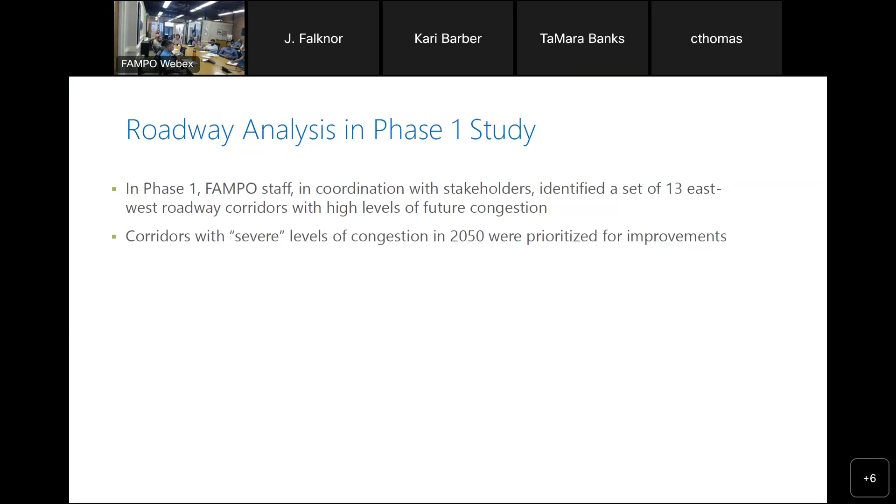We'll just jump right into it. Much of this is repeat. The 13 corridors identified are based on what we're calling severe congestion, related to the volume to capacity ratio anticipated in the year 2050 using the regional model. These are the 13 corridors we're studying. One thing I want to point out is there's one change from phase 1 to phase 2: we replaced Kellogg Mill with Enon. That was based on discussion about our priorities in the region, and Kellogg Mill fell out, replaced by Enon.

So as I was mentioning, what we've done so far in this phase is a validation of the model findings from phase 1, making sure we had the right files. There were some discrepancies, so we worked through those. For example, the model is from 2015, so there are projects that have been constructed, are under construction, or are in the CLRP that we want to make sure are accounted for in our modeling effort, so we're not trying to fix a problem that's already been addressed. We did find a few of those, so there was some back and forth with FAMPO, VDOT, and their consultant to make sure all of those projects are accounted for.

From that point, we identified those corridors. We validated 13 corridors with severe congestion. In a minute, Drew's going to jump into showing you where those congestion spots are on those corridors, followed by a segment on what we propose as potential improvement projects to address that. Keep in mind we're talking about 2050, as opposed to the smart scale process, which looks at existing VTrans needs and congestion that exists today. What we're trying to do is be proactive and get ahead of those future congested areas to make sure we have those projects in place. I think we're going to jump into those corridors, Drew.

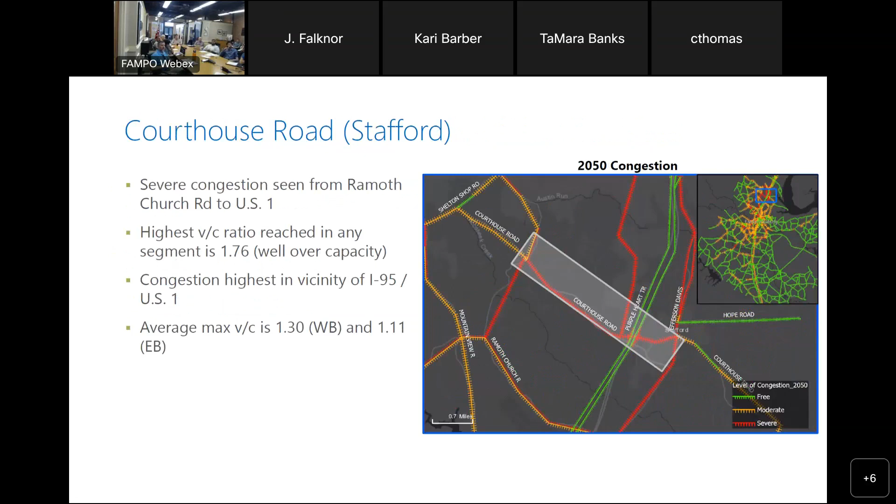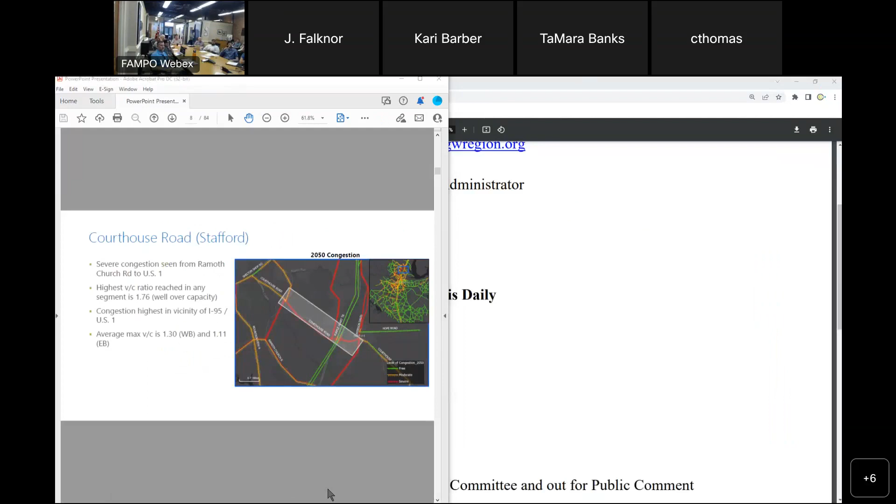So what we're going to do is make sure we've got this set up. Here we go. We're going to work our way across the 13 corridors.

Here we're talking about Courthouse Road on the Stafford side. You can see we're looking from Ramoth Church Road, coming across 95 and ending up at Route 1, an area where in both the east and west direction we're seeing red. Anywhere on these charts you see red, that's where capacity is over that severe metric. Here we actually have some segments where we get as high as 1.76, almost 2 times the capacity of the road in terms of traffic and congestion.

And so this is a corridor that's decently congested to 2050, heading into really the future heart of Stafford County.

So what you've done is looked at the 2050 model where there's going to be severe congestion, and then looked at the 13 roadway corridors and identified which portions of those corridors in 2050 will be the most severely congested and where we should probably pay the most attention. Correct, exactly. So our interventions are going to focus on those areas where we see the most red along those 13 corridors.

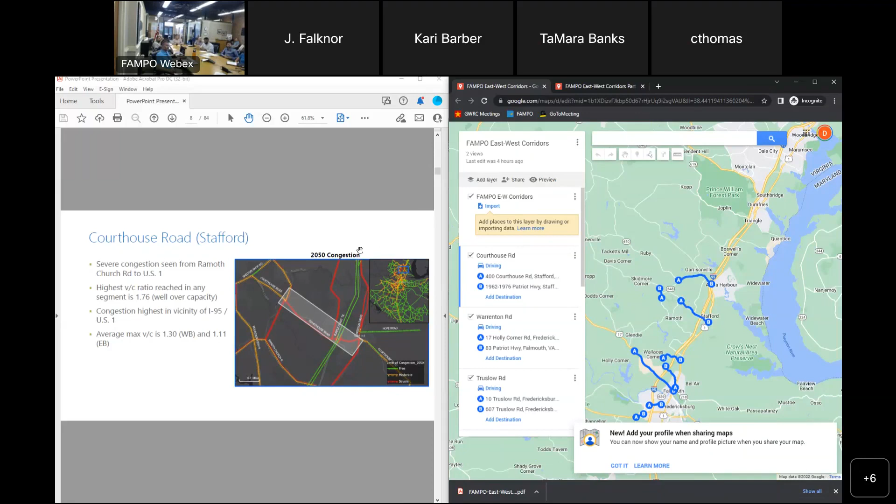Any other table setting about looking at these future conditions, what we call the no-build from a technical standpoint?

Okay, so our next corridor is going to be Warrenton Road. If we zoom in here, similarly we see a pretty long stretch - there's a little bit of a break, but basically all the way from Holly Corner across 95 over to Route 1. That's a theme to keep in our head - we're seeing pretty much severe congestion in 2050.

We do see another pretty high spike in one segment of up to 1.85, again nearly twice the average maximum VC throughout this entire area. The metric we're using, which was used in phase 1, is the average maximum - so this isn't saying just through the entire peak, but basically on a daily basis how high we're seeing VC spike throughout the day. In both the westbound and eastbound direction throughout this corridor, we're seeing over one - the whole corridor being over capacity on average.

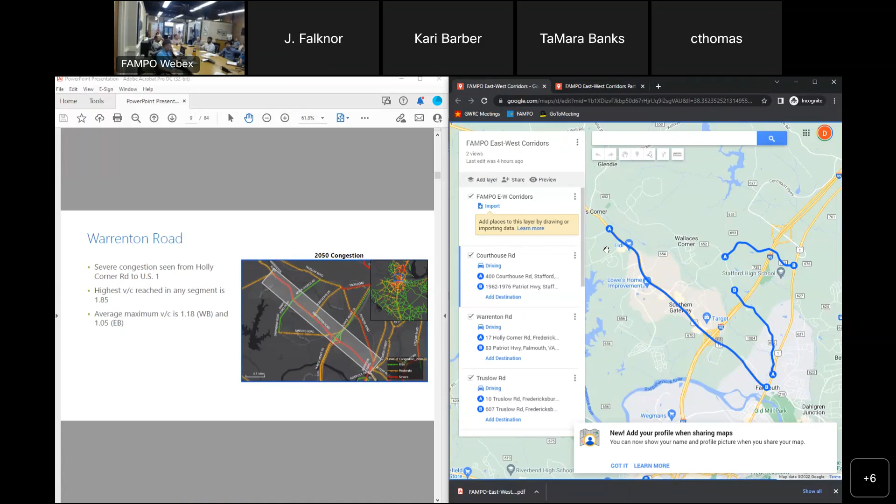That's US 17, if anybody doesn't know where Warrenton Road is. So here we have it on Google as well. Moving here, and so then we shoot over here to Truslow.

And you can see down in Google here. Now, Truslow is a different sort of road. It's a little more local in character, one lane in each direction. There's some short turn lanes.

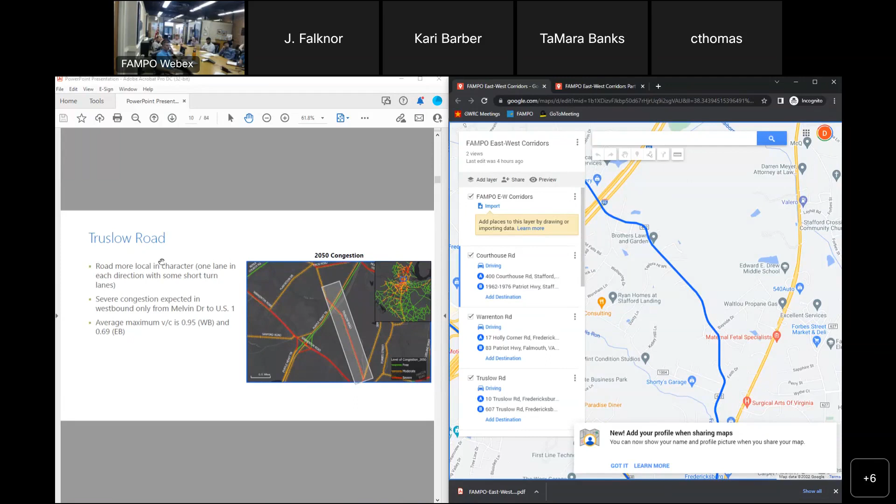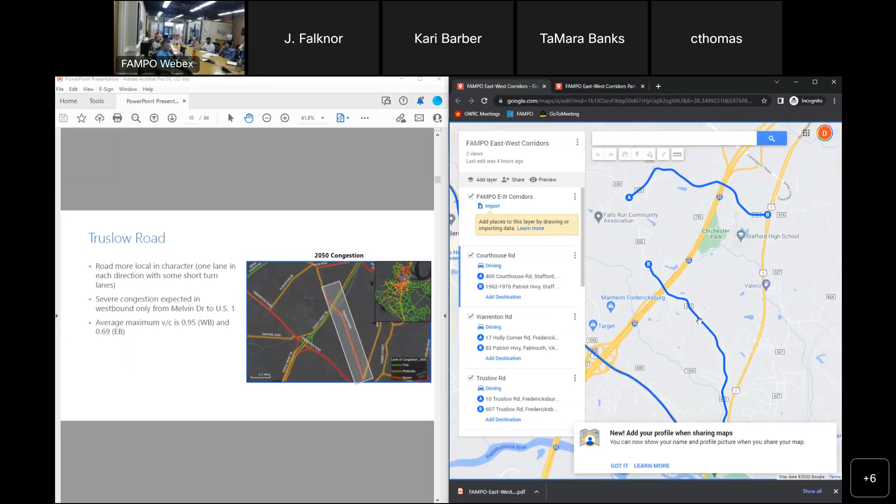What we see here is, as we try to get our awareness, the network's traffic is hunting for different east-west routes because there's a lot of congestion here, well over capacity. We start to see severe but not quite as bad congestion on Truslow going from Route 1 and crossing over to 95, dissipating a little as traffic distributes into the residential neighborhoods on the west side of 95. So it's not the principal route driving a lot of traffic, but it's becoming more congested as east-west and north-south flows continue to grow to 2050. That's the nature of that road, as you can maybe see from Google. Again, it's not a major arterial, but has more of that rural-to-residential character.

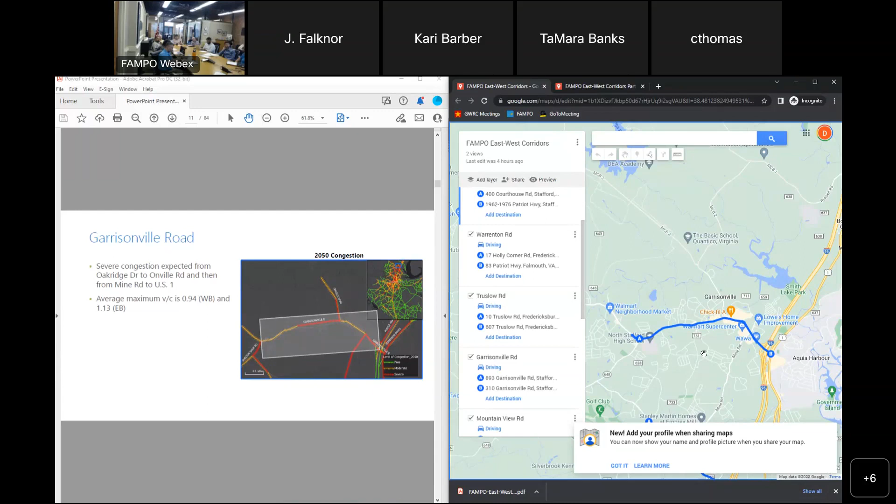We see two sections, basically from Oakridge Drive to Onville Road, then it lightens up a bit, and then as we get into both the commercial areas we have there, as well as the close proximity of both 95 and Route 1, those two major north-south drivers, that's where we start to see a spike again in the future congestion.

Then if we hop over to Mountain View Road, we get into another type. Truslow was one type of road, providing this sort of redundant east-west route. Mountain View Road sees congestion for a somewhat similar reason, being on the periphery of the main routes to 2050. It starts to see traffic around major intersections in what, again, is a more local, residential, formerly rural type of road. So we see this short segment of congestion.

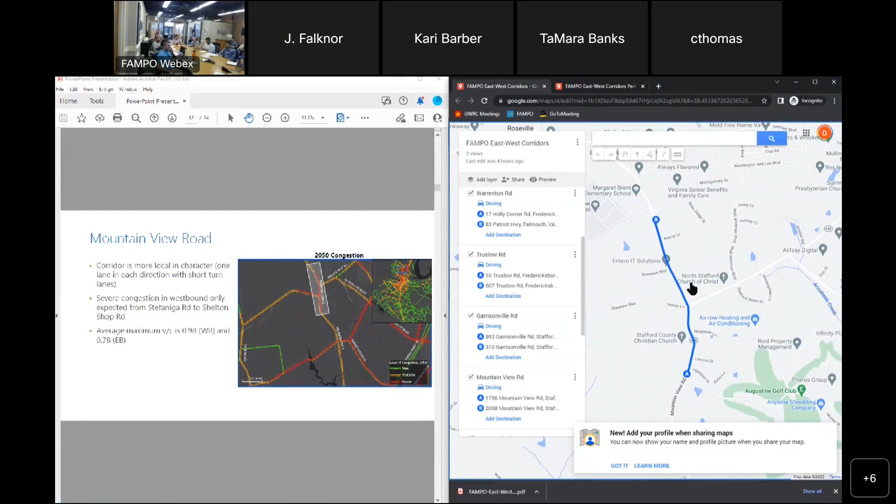I'm zooming here so you can see some of the things in the area. But basically from Stefaniga Road to Shelton Shop, you see a level of severe congestion in the westbound, northwestbound direction. In the eastbound direction, we really don't see severe congestion throughout this corridor. So it's really about that movement around to the west, more on the periphery of the heart of activity that we see in some of our corridors we were just looking at, like Garrisonville Road.

Taking into consideration the projections, are they taking into consideration planned land use changes, or is it the whole thing? Okay.

Exactly, and one of the things we'll talk about is there's a way to look at what the model is doing and also think about the land use vision that folks have, and how that might create more network effects to help deal with the funneling of traffic along only the major roadways. But yes, this is based on the 2050 land use projections.

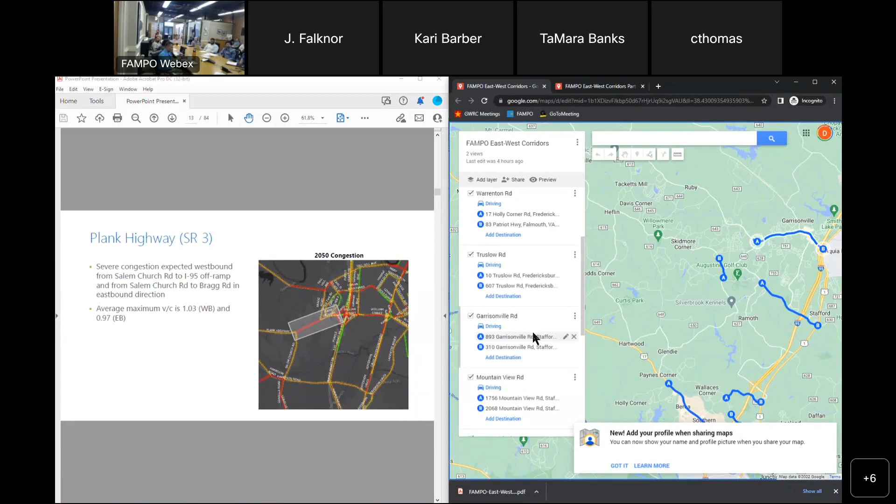So a road that a lot of folks know quite well. Oh, go ahead. I was going to say, Joe, it's the default land use. I know that there are a number of other land use scenarios that the model has, but this is just the default land use that's the projected base.

Yeah, so there are ways we could dive into greater detail about land use scenarios, as Nat is saying. That's Nat Grier from our team, who's really led the modeling work and is just joining us from afar today. That is an element of thinking through the land use and the future land use that communities want to create, and what roadway network best supports that.

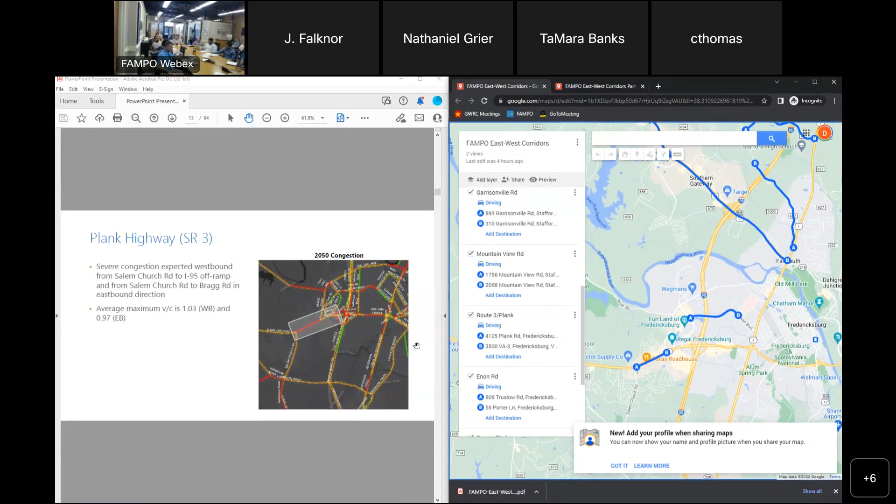Route 3, a corridor that folks know quite well, I think. Within Route 3, there's been a lot of study. We've been engaged with pipeline studies. The area that really pops out within this 2050 study is looking from Salem Church to Bragg, so really on the west side of that Central Park area, moving westward from the cities.

And that's an area where, again, there are gradations. Even though we're seeing red, where we spike up in that maximum volume-to-capacity ratio, before we were talking about 1.75, 1.8, this is a place where we're talking about 1.03 and 0.97, so hitting the stats, but not quite as severely. We also know this is an area where there's very complicated traffic operations, and therefore that influences how much we can do here to try to bring those numbers down to reduce congestion.

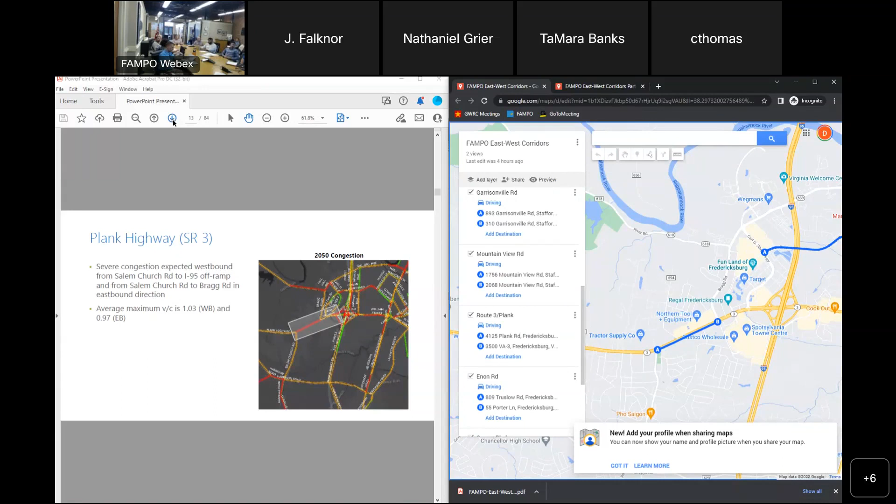Enon is another road, sort of like Truslow, showing this east-west workaround. Enon up here provides useful connections from the west side and the residential neighborhoods over to Route 1, and then over to the on-ramp that Centreport provides onto 95. The nature of the circulation is such that people have to go here and there, so it gets congested, but not as severely as some other routes.

As we'll talk about, it's an interesting place where north-south traffic affects east-west mobility. One of the reasons for this study, that Ian was very invested in, was advancing the study of east-west mobility, since so many of the conversations in this region are about north-south. We can't always escape the impacts of north-south traffic on east-west performance, and that's something you'll see in some of the proposals we look at, balancing east-west mobility against the tug that north-south traffic has on overall operations.

Then we'll shift back down here, to Cowan Boulevard, connecting the city and the Central Park area.

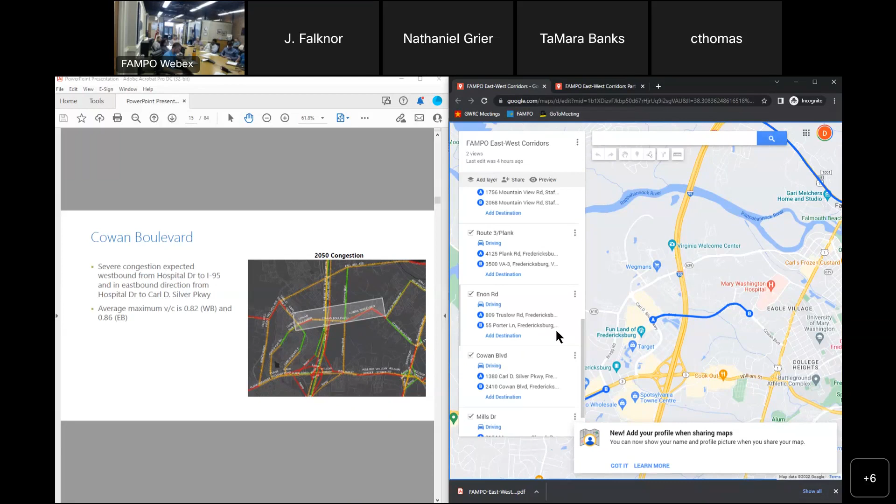This is an area where we see some severe congestion near the hospital, and then in the Central Park area in segments. The quality isn't great there, but we have basically segments of red, and in the middle, actually around 95, we see a bit better operations. There again, remember 0.82, 0.86, those are about our threshold, so really in most of this we're just at the threshold. That goes to a point of whether this is a place we would invest, versus other locations that might be more severe.

So we'll keep moving through those and get to the fun part, which is what do we do about it?

Mills Drive is another area identified in phase 1 that's somewhat like Mountain View, a specific area where traffic comes together to create a discrete section of congestion. You can see here from Virginia 608 to Benchmark Road, in the vicinity of Spotsylvania Station, we see some congestion both westbound and eastbound, but the eastbound, as you can probably make out on the map, has a larger section.

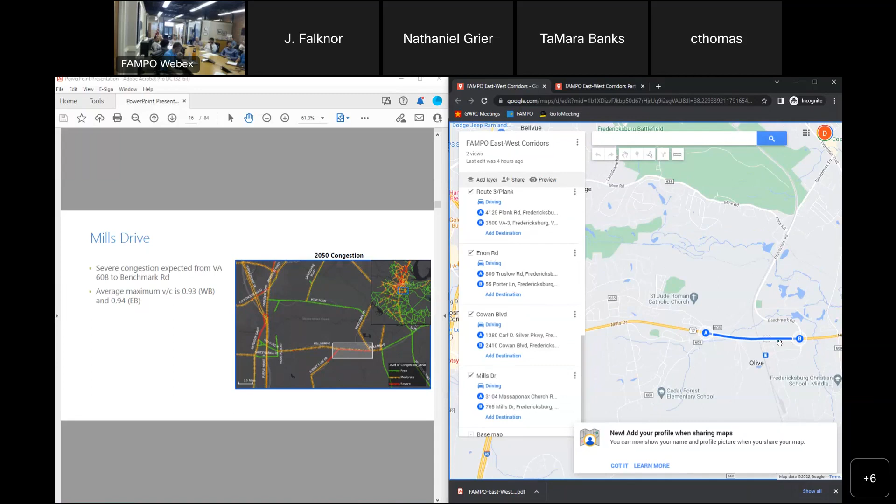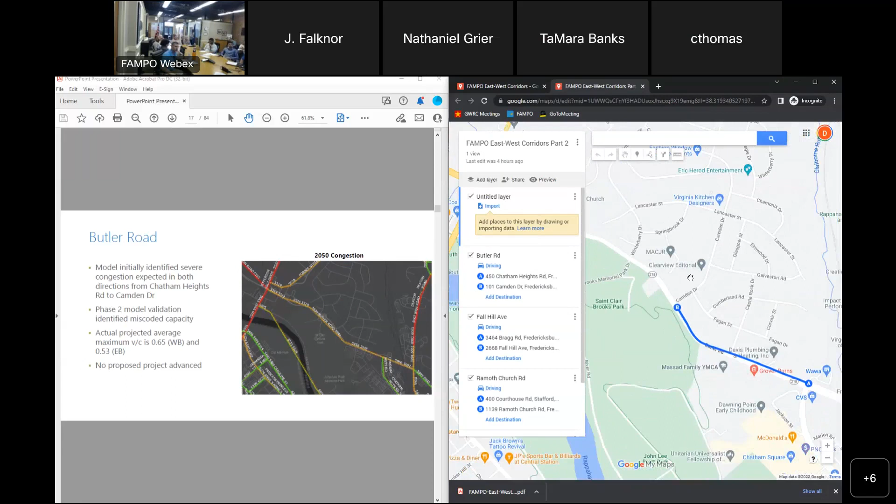One of the things we did during the model validation period - if folks have worked on model work, they know there's a lot of iteration to get it right - is find that Butler Road in the phase 1 study hadn't really captured all the capacity that's there. So what we found is that the congestion seen in phase 1 for Butler Road, we don't actually expect to materialize in 2050, and it should remain under the severe threshold. This is just outside downtown Fredericksburg; we were initially seeing some congestion in the vicinity of this neighborhood, but that turned out not to be capturing all the roadway capacity. So we won't talk any more about Butler Road today.

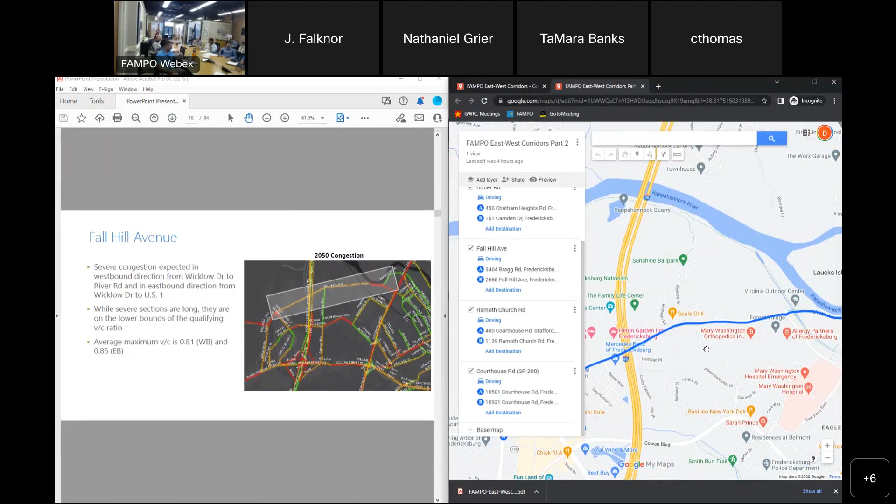So Fall Hill Avenue is similar to what we were seeing below with Cowan, though with a bit of a longer edge - really it's on either end, with our focus on the east end coming towards Route 1, where we see the section of congestion. Generally the sections we see are on the lower bound of that congestion threshold.

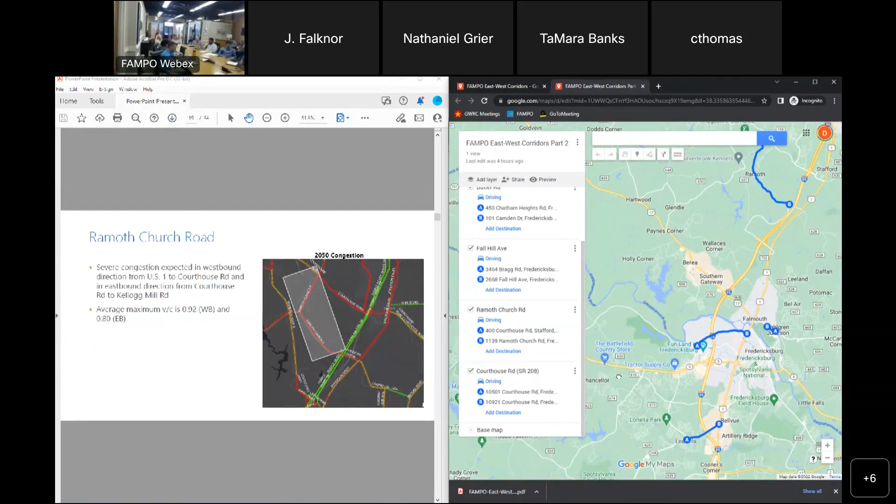Let me pull up Ramoth Church Road, another one of these roads on the periphery of growth activity seeing more congestion. In 2050, traffic seeks to fill out the network that's there. You can see a relatively long section on Ramoth Church coming around here, from Route 1 and Courthouse Road, connecting all the way - the map wouldn't go all the way because of road work. So from Route 1 to Courthouse, we see this prolonged section of congestion in the westbound direction, much more modest in the eastbound direction, not continuing the whole way.

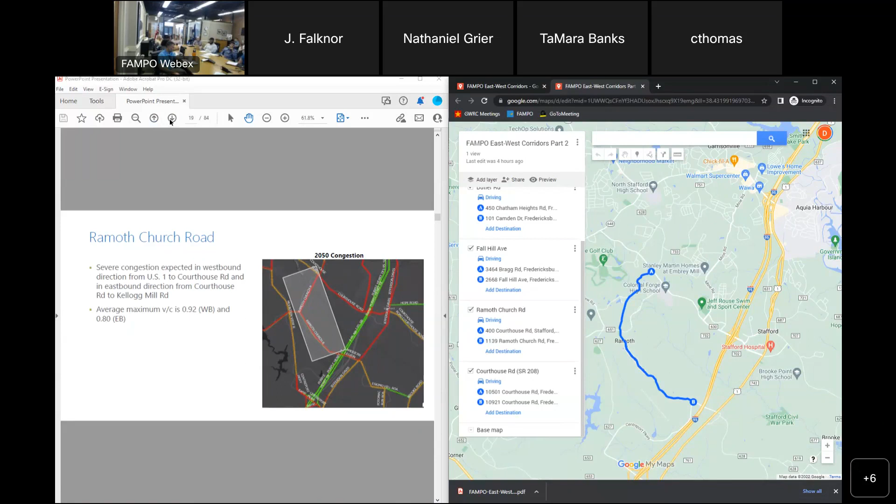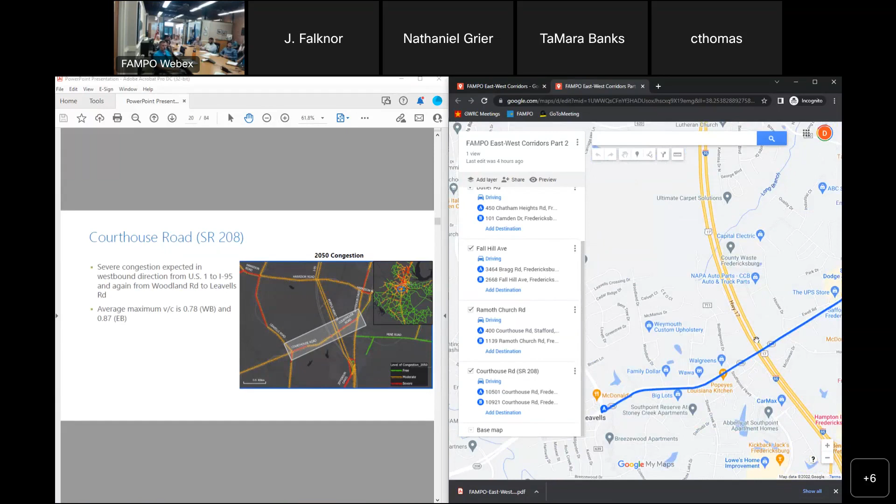Then the last one, having worked our way through it and setting ourselves up well for what we need to do next, which is figure out how to deal with these challenges, is Courthouse Road, another area that's a pretty wide arterial today and is just hitting that threshold. In the westbound direction, its average is below 0.8. In the eastbound, you can see segments of congestion, particularly around the cluster between 95 and Route 1, near Leavells, where different traffic comes together in an area with lots of industrial and commercial, auto-centric uses.

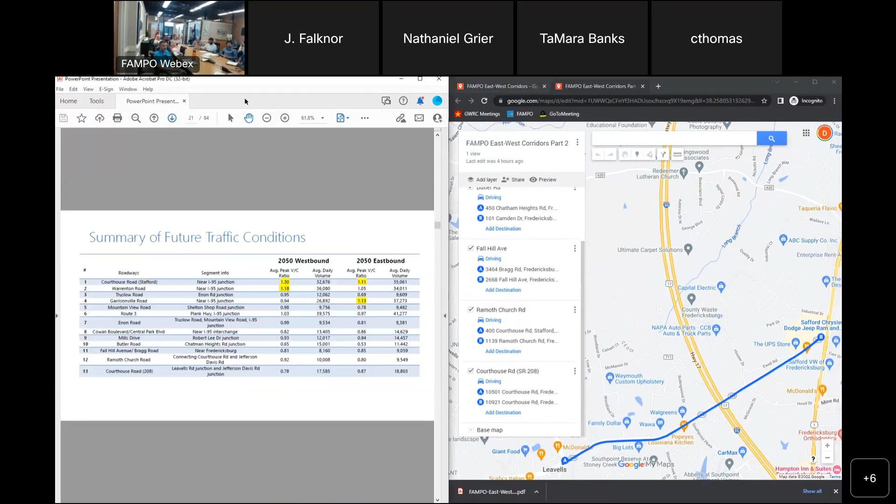So what do we see overall from that picture? Basically, we see a lot of roads approaching that 1.0 threshold where things really get terrible, and a lot of roads that have crossed the 0.8 threshold, and then a few places, like Courthouse and Warrenton, where that V/C ratio gets substantially higher, above 1.

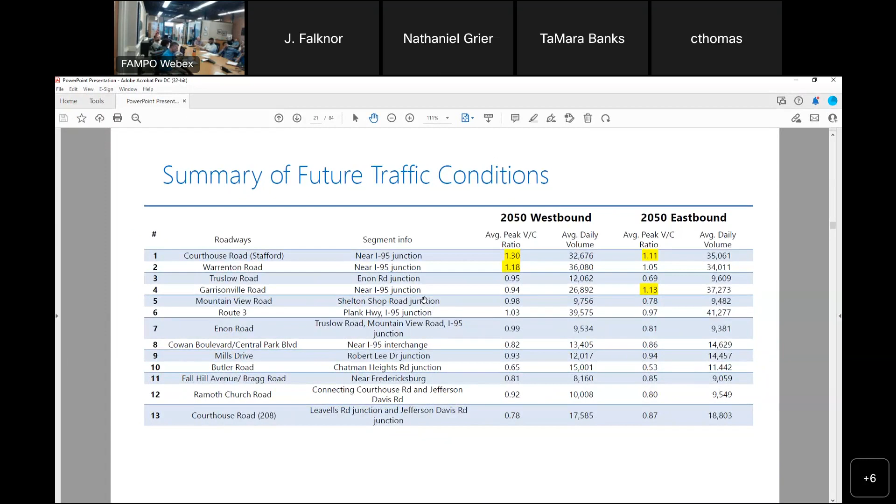So where is this all happening, and what seems to be driving this in the model? A couple of key findings to orient our strategies: congestion is often highest where two things come together — auto-oriented commercial activity creating trips in many directions, abutting I-95 and Route 1 movements. So we have a lot of regional access hitting against what's trying to happen in terms of local mobility, clustering together in a pretty tight space.

We know from other work we've done that this poses a lot of challenges, not just in this model, but when we actually try to do traffic simulation in a detailed way to move this traffic around. A lot of the east-west traffic, because of what's happening at 95 and Route 1, means the north-south traffic we thought we were putting aside for this study is actually playing a meaningful role in how this east-west traffic operates.

So what we do to the north-south will play a role, we think, in how we manage the east-west over time. In addition to some of the strategies we'll propose, we have a lot of congestion on roads that are already pretty wide — roads we've already invested in making larger to handle more activity and capacity. So some things to think about are parallel routes and access management, considering future land use conditions and how these trips get handled throughout the network.

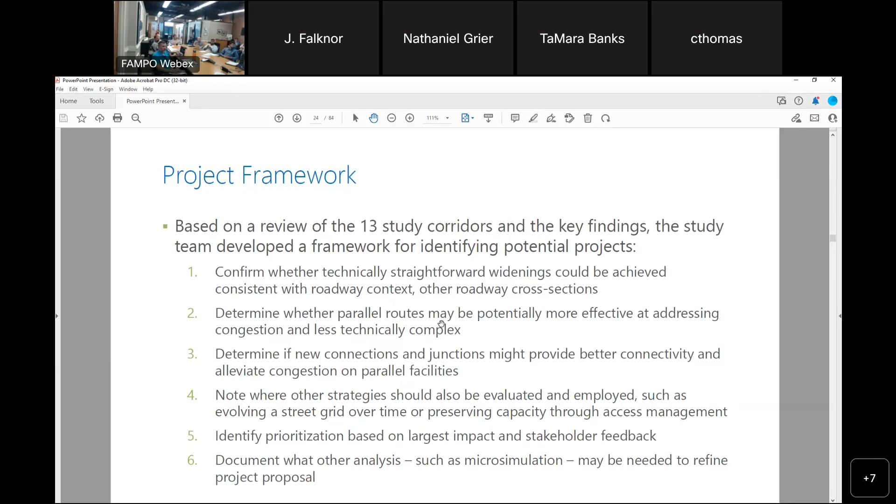Just some caveats about the proposed corridor projects we'll go through. These are draft proposals, ideas that VHB developed based on our experience and our review of the region's plans, but they're really our proposition to be put forward and engaged with here. There's more work that would need to be done to figure out if these are good ideas beyond the fact that they seem to have some traffic benefit—work with stakeholders and traffic operations.

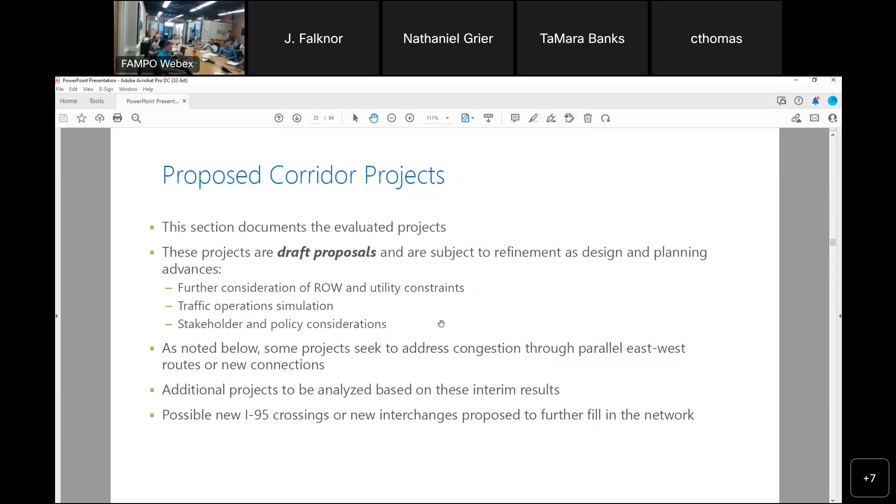We'll talk about a few of the big items, one of them being new I-95 crossings and interchanges, as well as connections across the Rappahannock. We have this slide that goes through the individual projects, and I'll talk about them specifically. There are a few regional projects, we're calling them 4, where we think different routes can benefit from a cluster of projects—so if we're thinking about 13 or 12, there are about 4 projects that we think can have potential benefit across different corridors.

Those shared, regional corridors are looking at: extension of Centreport Parkway between Ramoth Church and Courthouse—we'll show this more on a map in a moment—a new Rappahannock connection, combined with potentially, or separate from, an I-95 interchange near the Virginia Welcome Center, a new I-95 interchange on Harrison Road, and also a smaller project in comparison to those three big regional projects: widening of Fall Hill Avenue and connecting to Mary Washington Road near the hospital—a project that a couple different corridors benefit from, which is why it's on this regional list.

Before you move on, just a question—is there any significance to A, B, C, and D? Is it just in any particular order? I noticed on some slides later you also have A, B, C, and D, and I was wondering whether there's any significance or if it's just random. It is in the order in which they emerge if you read this table in the slides, so they're no particular importance—it's not a prioritization, we haven't gotten to prioritization. We're just trying to keep the logic of this table in the presentation.

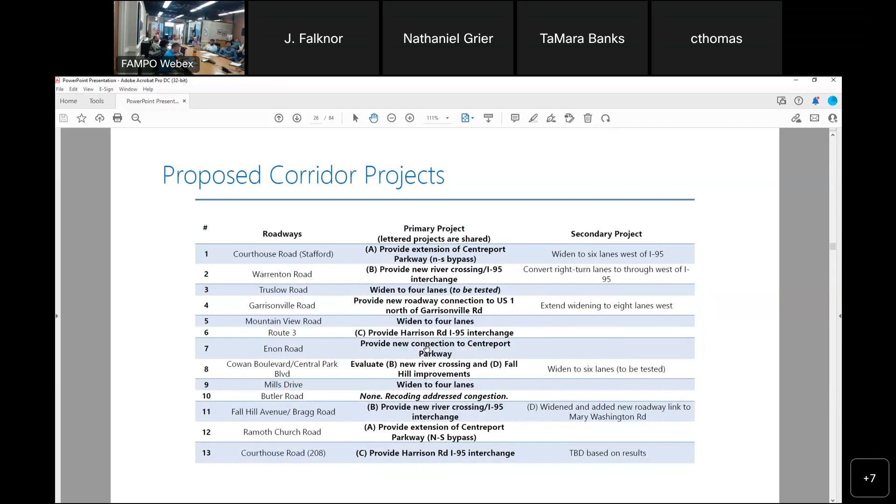Great. And so just to put it on the map there—I'm going to go in there.

So now these are key findings about these big picture ones. We'll talk through the different specific items.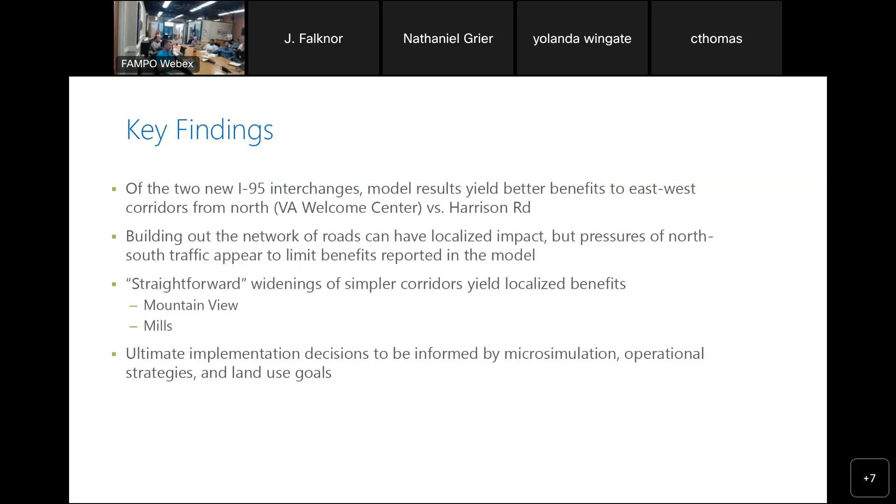And then we've made this caveat a few times, so I think I'll dive into the corridors. So Courthouse Road on the Stafford side, hopefully I can go back to Google Maps if people want, but maybe we're situated now. We basically have been looking at two things here. Go back to that table. Looking at that north-south bypass, also looking at widening the existing 4-lane section to 6 lanes. And so what do we see?

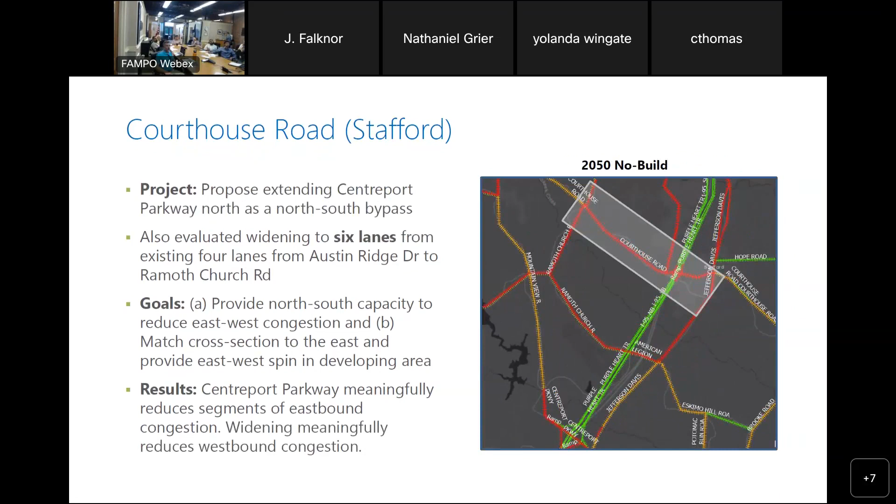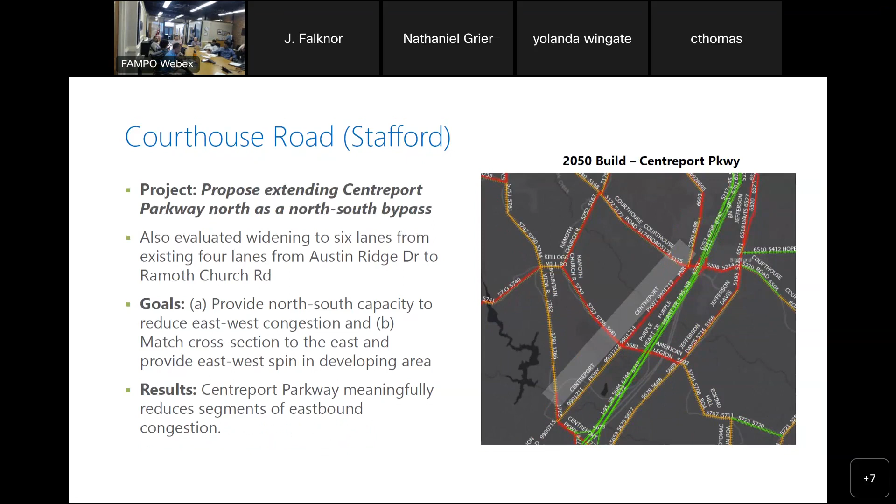What we see is that the addition of Centreport and that new access—if folks know exactly how Centreport's laid out, you'll see that this schematic isn't exactly it, and that's just a matter of the modeling. And all of this, that red is what we're trying to get to. So this Centreport Parkway comes in, and in the eastbound direction, courthouse, we address that latent congestion problem, but Centreport does pick up a lot of traffic. It's not a spring chicken in terms of the traffic it's handling. So that's something to better understand through more analysis, in future study, of how Centreport can be made to operate because of that east-west benefit it has.

We just ran this model run, why it's another color in approach, and in the final report we'll have this all squared up. But basically with the widening, whereas here we saw the east-west benefit, the eastbound benefit, with the widening we see the westbound benefit. So we see the different goals of the different traffic. Don't have a detailed answer of why that is quite yet, but we do see that each of these projects is helping with either direction.

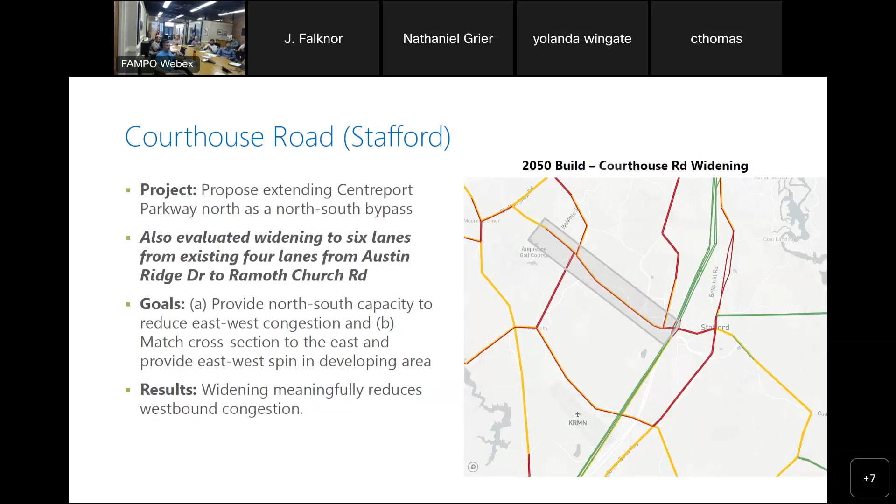I should have a cash register ringing in my head for this. So we've got the big picture one: the New River crossing along with I-95. And then in here we have some right turn lanes that we can convert to throughs, to get ourselves some more capacity so we have 4 lanes in each direction.

So what we see here is that the new crossing interchange brought together reduces congestion in a few segments, basically by 20 to 30%. Some of the more meaningful reductions we see throughout the process are in these segments along the corridor. When we talk about converting the lane to a through, we also see a pretty decent pickup, a 20 to 25% reduction in localized congestion, but localized is the key word there, very focused on the places where the lack of capacity meant the through wasn't getting enough traffic through that intersection or area, versus something more regional in its benefit.

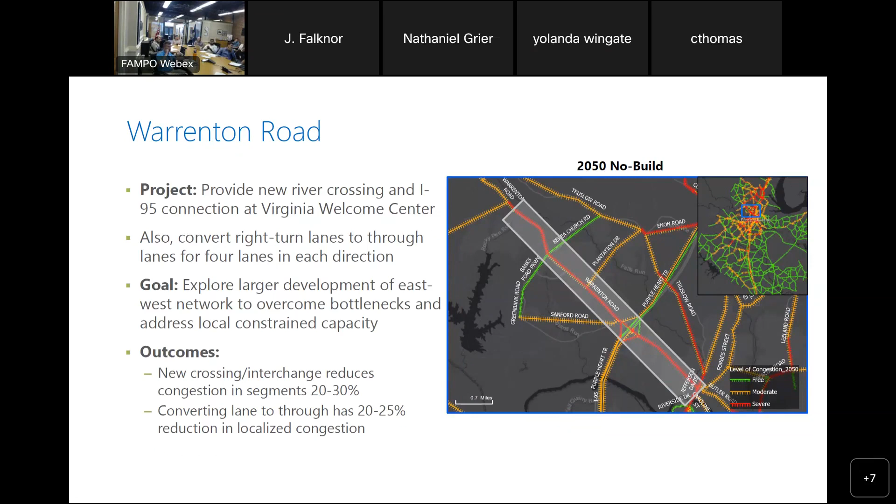So let's walk through how those different pieces come together. I'll start with the interchange because you'll see this a couple of times, and I recognize it's a bit of a mess, so we'll take a moment with it. This is the no-build. We have the big gap over on the west side here. What we looked at, we evaluated both things together: a connection across, and again this is not design, this is representational of going from over here to over there, getting that connection across and then getting the interchange too.

We do follow Celebrate Virginia to sort of have a route and have trips that we're building off of. I know there was some discussion about whether that's an appropriate connection earlier. We welcome all of that sort of feedback.

With your white block from here, being the furthest from the screen, it's difficult to see whether there's an improvement on US 17 or not, because the white color just makes it hard to see. Yeah, we'll definitely work on the representation here.

But the story is, if we start over on the far left, you can see a lot of red in this section. And then over here, all the way through Berea Church and Plantation, right until we get into the mess around 95, we're seeing that reduction in congestion. Fall Hill moves basically from on the verge of severe and severe, to becoming free flow to less than severe throughout its corridor. Warrenton sees a relatively large segment, until we get into the morass around 95, improve in its operations.

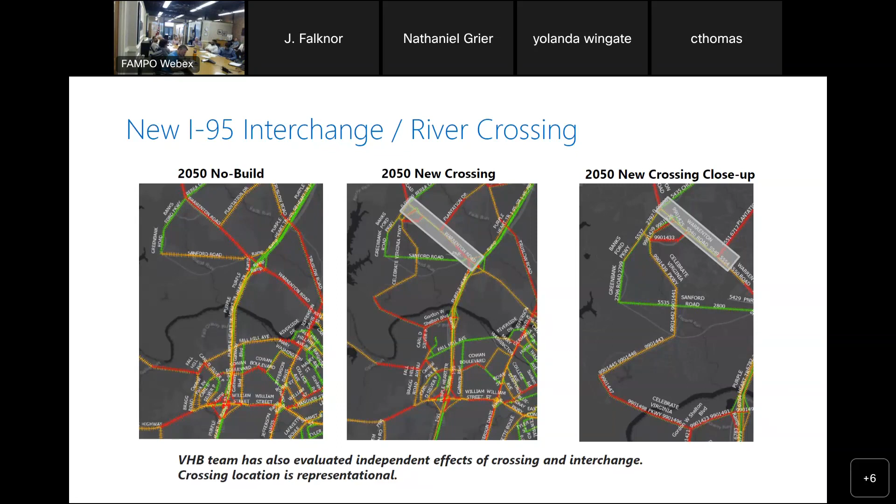Well, I guess the Celebrate side. Would it hook into the Celebrate Parkway? Gordon Shelton Boulevard is the road it would connect to on the western side. So, with this, Gordon Shelton Boulevard, it's the one that runs dead. It doesn't go anywhere. It goes past Celebrate Virginia and then ends just in the middle of nowhere.

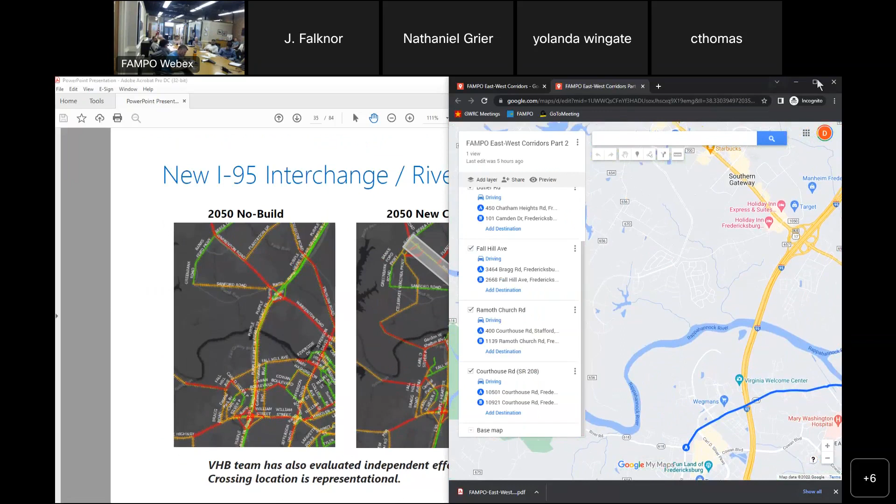The Celebrate Virginia folks had designed an on-ramp, or got a consultant to design an on-ramp or whatever, back in the day, and it was just never built.

So it's the one that's parallel to... Does Carl D. Silver Parkway become when it goes across Fall Hill? Does it carry on being called that? Yes, yeah, so it's parallel to Carl D. Silver Parkway. It's the one that's parallel to it. It ends now, it doesn't go anywhere, it stops.

Was that helpful? Are there other questions? Oh, I got it covered. Okay, well, once you finish, you did a lot of effort to get here.

So okay, sure, and yeah, we'll bring this up as one of these regional projects. There'll be something that we'll come to. But let's also look, oh wait, oh I thought you were going to play with the Google Maps.

Okay, so a couple of questions about this one, just real quick. So you've looked at the congestion on Warrenton, okay? Clearly that's got a benefit. Yeah, look at all that red now down in the city of Fredericksburg. So what are we doing about that? I mean, this just seems to kind of put one problem in a different jurisdiction.

I'm not quite sure I understand. Sure, so I think there's two layers on this, and Chris, you might have some thoughts there. So one is there's always a challenge of sort of chasing the traffic. Right, it's sort of a broad problem in how we deal with congestion. It sort of raises non-widening strategies as being part of the solution. It's part of why we have a transit component to this. It's part of why policies around parking, around land use, matter for what happens.

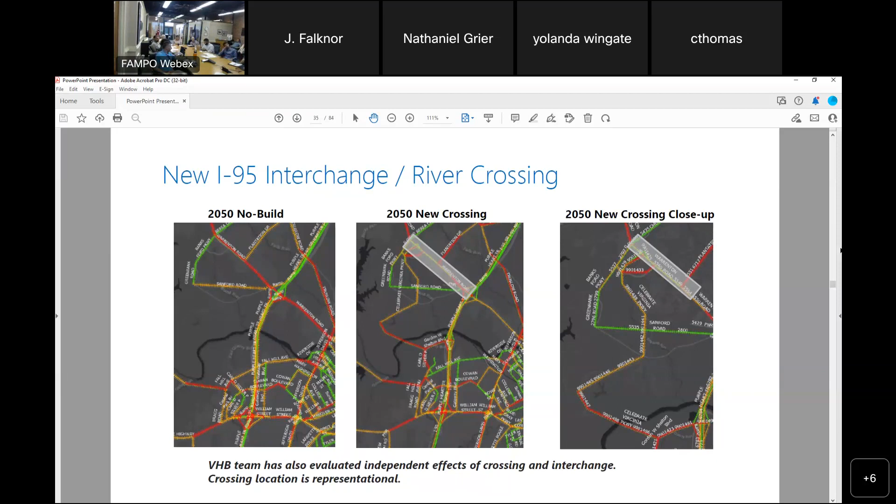All right, let's talk about a couple of different flavors of the types of things we're looking at. This is a big one, and it raised all of the policy issues folks are discussing - fundamental, big picture items where getting both that high level and that granular direction is critical. Our high level thesis is that these east-west corridors are facing a lot of challenges, and they force a response in terms of conservation, traffic management, planning, and mode shift questions that folks are raising.

So we can look at what some of the other east-west places are seeing and what types of solutions pop out, and we'll welcome the region's feedback.

So truthfully, we haven't modeled anything just yet. This is something where we have decent operations in the eastbound direction. The westbound gets more congested, but it's not too close - again, more residential, more rural. Something that could be widened and then maybe relieve some off Warrenton as part of a more localized network with a little more capacity. But it's something we're waiting to see how the rest of the projects come out.

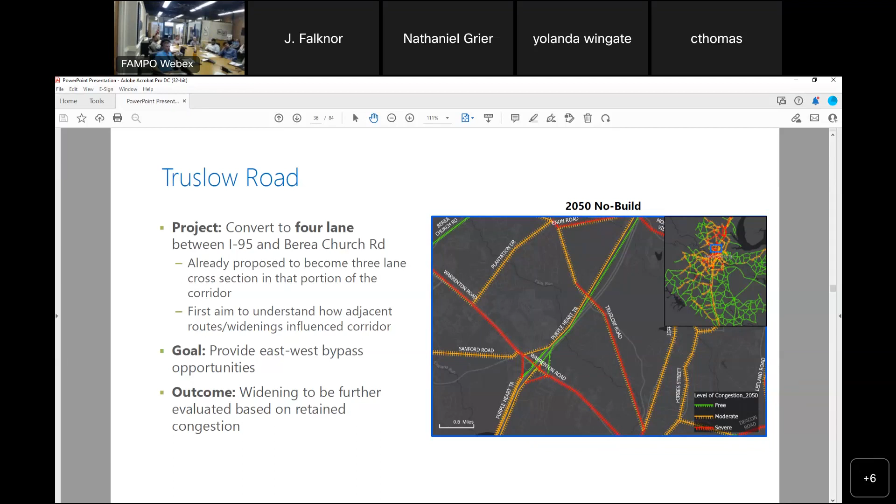So that'd be something we do in the next couple of weeks here. A couple of places where we did look at a couple of different options. Garrisonville Road looks at maybe two approaches: the widening strategy, a section where we're now all the way to 8 lanes, and then also creating a bit more of a grid.

Within the model, we evaluated what's called a centroid connector, which means this isn't exactly a road in this place, because everywhere you look to put a road, there are some challenges you need to think through. But if we can get that access across to that local point, this is about trying to bifurcate the regional travel from the local folks, and thinking about how we can build out better access to the economic development area here. So we look at going across 95 without providing an interchange, and basically we see in the areas right around 95 about a 10% reduction in congestion from adding something like that.

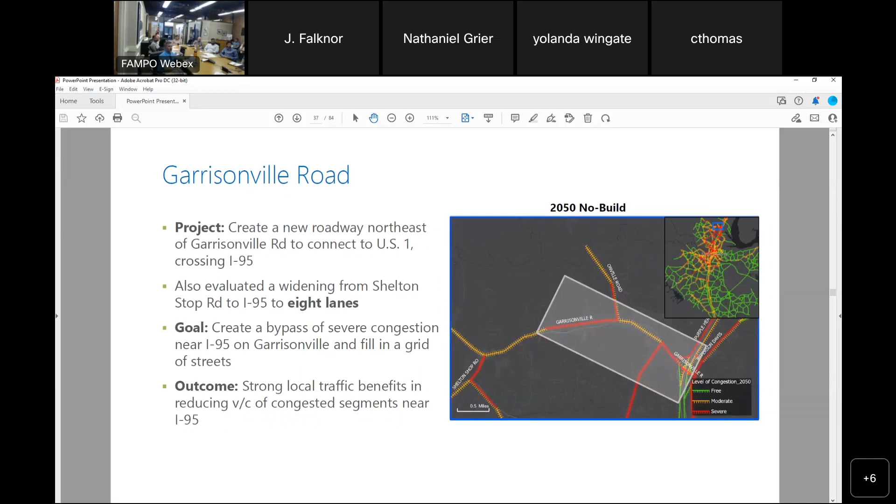And again, there's some graphic improvements to make, to everyone's point. When we look at the widening, if we go back to where we were, basically the widening out in the western section clears out this red, creating a consistent orange section all the way to Shelton Shop, until we get into the congestion approaching 95.

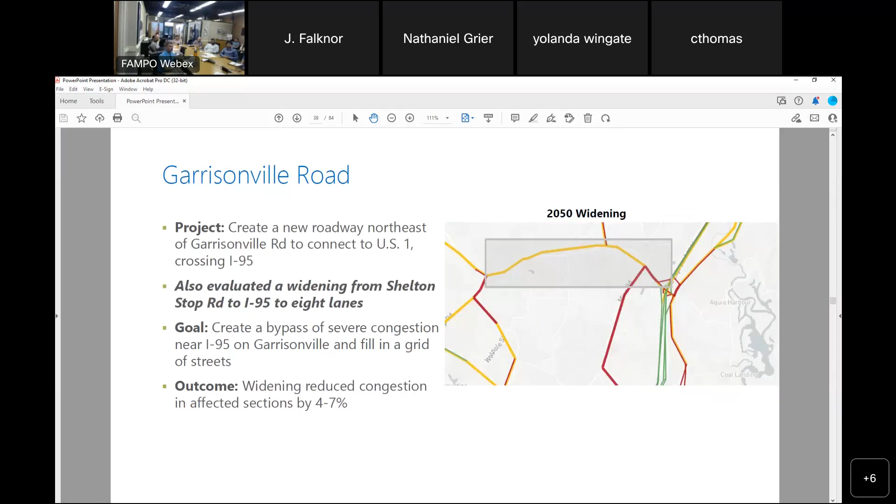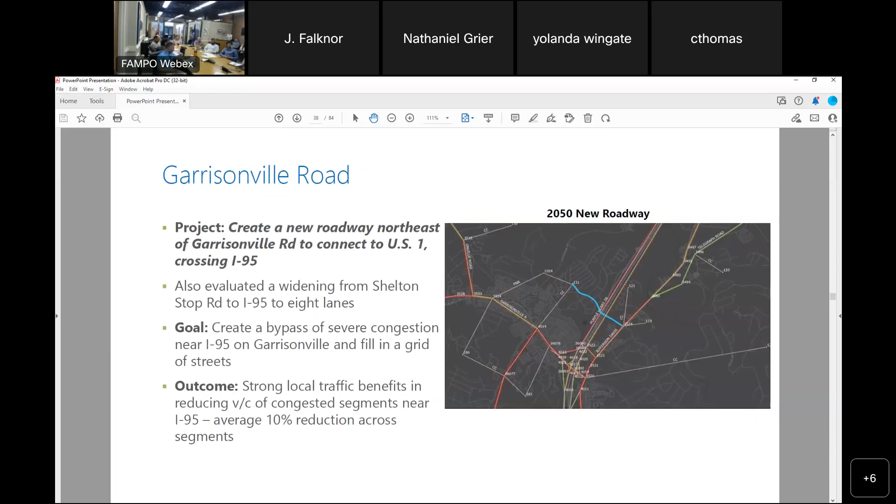So this being the ability there, again, to posit these two types of strategies: do we look at further widening the main line, which has pros and cons and some limits based on what traffic operations can actually handle? Or do we look at strategies around building a network that tries to pull things off of the main line in other locations?

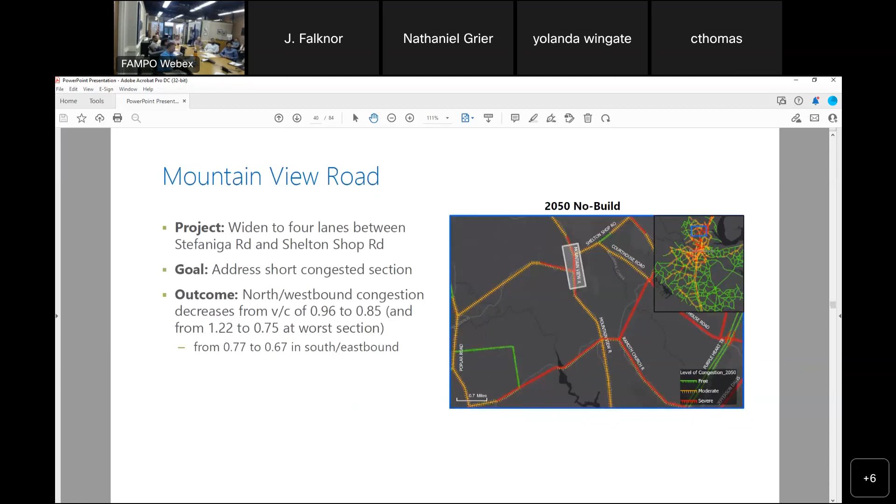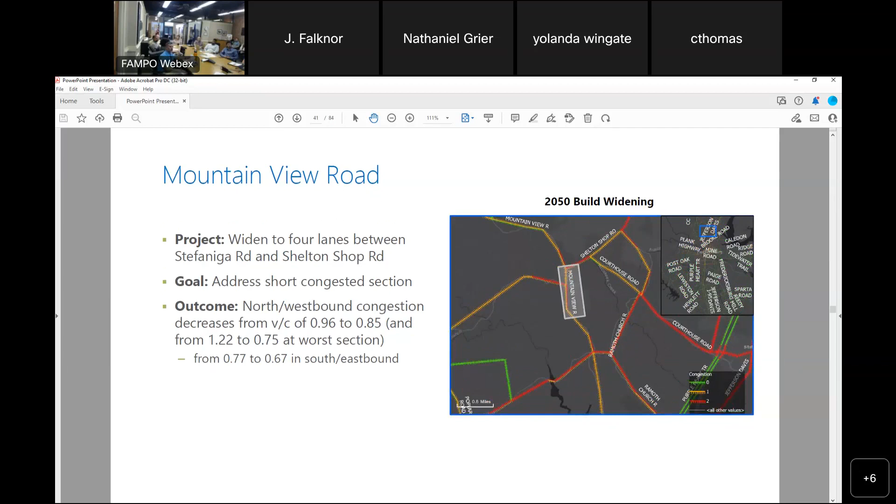Mountain View is sort of a good sample of what happens when you take one of these roads on the periphery where particular things come together. You add some simple widening, and here we still see a little bit - and I think this goes to the question about exactly how we show the red versus the pink. We see improvements along the way. There's still demand, and you have this cluster of connections, but with a little bit of widening in that northwestbound direction, we're able to solve a good portion of the congestion.

And then Route 3, right? We talked about how Route 3 is a very challenging area. A big pipeline study we've been working on is just dealing with a lot of challenges in trying to add capacity or make things flow better in this section.

So we wanted to look at this parallel route, which looked at the Harrison Road interchange. And basically what we saw there is pretty modest, about 1 to 2% improvements in congestion in the section of Route 3 when we brought in the Harrison Road interchange. It still helps us give east-west choices to users, but it obviously brings more traffic onto Harrison Road, with the attendant increase in congestion in certain segments, particularly with the ramp interactions there.

So we're testing that parallel route grid. It's not showing like gangbusters in the model, but it's the sort of thing that, knowing there's pretty limited things we can do on Route 3, well here and then the stuff we were talking about to the north are some of our options. So do we think modest gains in the model, but the logic of building out a network makes sense to us.

I have a question about this one. This Harrison Road interchange, with respect to the Route 3 study, would this be a recommendation to replace those improvements on the corridor study for Route 3, or is it in combination with? I know there's been talk about a grade-separated intersection improvement at Carl D. Silver leading to the mall. Is that in addition to, or how does that work?

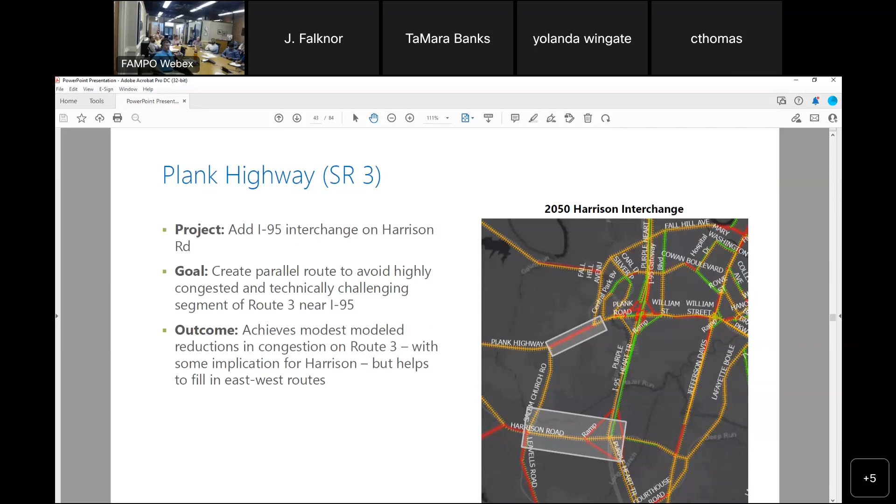Yeah, and that's something we'll document more in the report, but just sort of intellectually looking through the corridor, again the other push is, do we just keep widening the main line? I know I sound like a broken record, but that's really the fundamental policy question we're considering. And this is an area too where the difference between this high-level modeling, where does traffic want to flow, and then more detailed micro simulation, mesoscale simulation of creating a network, different land use scenarios, does Harrison Road help all of this operate better? More and additional tools can help us answer that question.

I want to make sure we have time for bike and pedestrian pieces as well. So I'll just highlight here, and folks will send out, this is slightly modified just to allow discussion on these points, and there's some good follow-ups we can circle up on and coordinate with Ian on next steps. But Enon is another location where we have a lot going on. Centreport performing poorly, Enon, and this is coded as Mountain View, but it's all Enon over here, that sort of loop around which there's a project to modify. Just a lot of bad circulation paths here, contributing to some challenging congestion.

So we look at what can we do, and you see here that we're able to create a little bit of connection. It doesn't solve all of our red areas. We see some areas, particularly as Centerport comes into Route 1, see some improvements. We see some improvements in eastbound Enon. An area where we think, again, building out the network in a north-south direction gives some more choice and some more movement.

Now, this is not necessarily the easiest, it's not an easy intersection to draw. There'd be a lot to think about how this would actually come together here. But this is a place where we do see some improvements to localized network filling out.

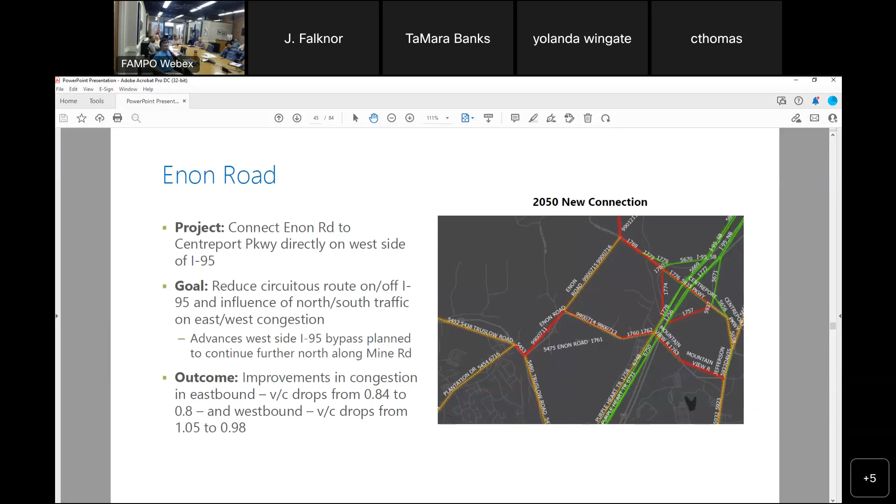Sure, I think it would be helpful to switch over your map. Oh sure, to see it. Yeah, just particularly to highlight some of that geometry there. So here we have Enon, and just basically looking at this point here.

There's also environmental impacts associated with this, certainly. That's a serious consideration. You can see the green there.

But in terms of connecting with that larger conversation about Centreport Parkway as a potential north-south, west side bypass, and exactly how that would filter its way through - not the purpose of this study per se, but just to put out here and say, okay, if we're starting to fill this in, Centerport Parkway more, do we start to see some localized benefits and more regional benefits?

We have a member of CTAC who proposed a roadway in that sort of vicinity recently. I think the comp plan - Becky, do you know if the comp plan... Alex is here, there was some discussion of that. Yeah, I think it talks a little bit about having that connector there from Centerport to Enon. Sort of a future idea kind of thing.

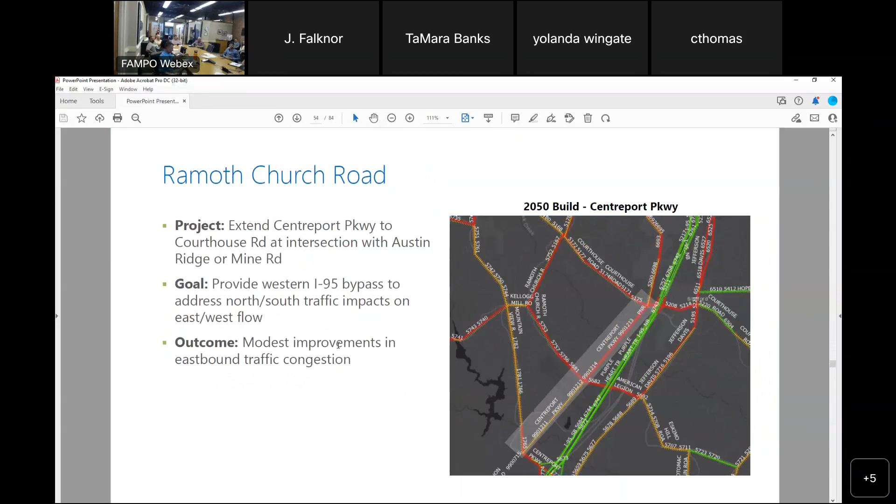As an element, we'll show more. We're looking at how the Harrison Road interchange can help here too. But this sort of also gives an example of another bucket of a type of corridor. This section here is very industrial - it's like a million little light industrial items here. And then this has your sort of standard auto-oriented retail.

And we have these little segments, so can we think about, in addition to whatever might be proposed on Courthouse and what Harrison might do, thinking about how the sort of future planning of industrial, which is going to continue to be a major economic driver in geographies like the Fredericksburg area, can be coordinated.

The new VA clinic, the new Veteran Affairs clinic, is in that vicinity too, if I'm not mistaken. Yep, correct. So it's going to drive - they claim 3,000 new jobs right there where that red is in your box. Which red? The top - east side or west side? The east side red there. 3,000 additional jobs over some time, maybe 10 years, I don't know.

Yeah, and so we see this as pretty localized - a combination of, yes, there's some potential left turn capacity there, but really thinking about the interaction of the types of activities on this section and seeing how Harrison Road helps address it.

We do have a complementary road in our comp plan, and we're actually pursuing part of it with private development potentially - there's Seven Rolling Drive to Harrison Road. Just a connection. Yeah, it's been in our comp plan for a while, and it's starting to get a little bit of traction.

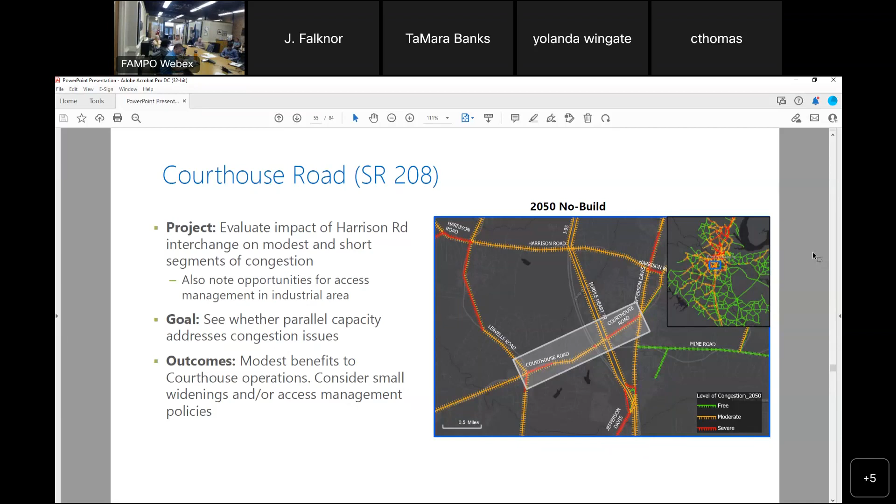Good, and so that's sort of the bucket of things we've looked at - big regional questions, trying to fill in a network, whether that's with north-south, whether that's with east-west. Some places where a widening on a straightforward stretch or on a more complicated stretch, but seems to have localized benefits. And then all the host of policy questions about how you might make those more successful, how you might use transportation demand management strategies to make the most congested places work well, how transit and everything else can play a role. And I think we've gotten a lot of good feedback. We'll provide this so we can get more.

We also want to talk about the other piece of this, which is the pedestrian bicycle connection work that we've also been advancing. I think I'll pass over to my colleague. Before we do, can we skip down to the transit piece, only because that topic came up and I want to make sure that we respond to that. An update on transit, and that'll dovetail into the ped-bike discussion.

Yeah, I'm going to need to advance the slides, I realize. The story there on transit - what we've been working on is trying to identify a set of potential strategies on the Route 3 section. There was an area of question and concern about traffic operations, VDOT's long-term plans and short-term plans on Route 3, and what can be accommodated.

So we've been evaluating things like center running operation, looking at different alignments to the corridor and seeing what can or can't be accommodated. We'll update the transit report on that front. But we basically think we're in a good position in either case to offer still a very successful east-west transit option, and then the sort of refinement will be the future Route 3 and what the transit line plays there.

As I mentioned earlier, there were 4 ped bike projects that we were evaluating. 2 of them are transit related, so it's that last mile connectivity, an effort to stimulate use of VRE stations, specifically the Brooke station and the Spotsylvania station. So this here captures our work.

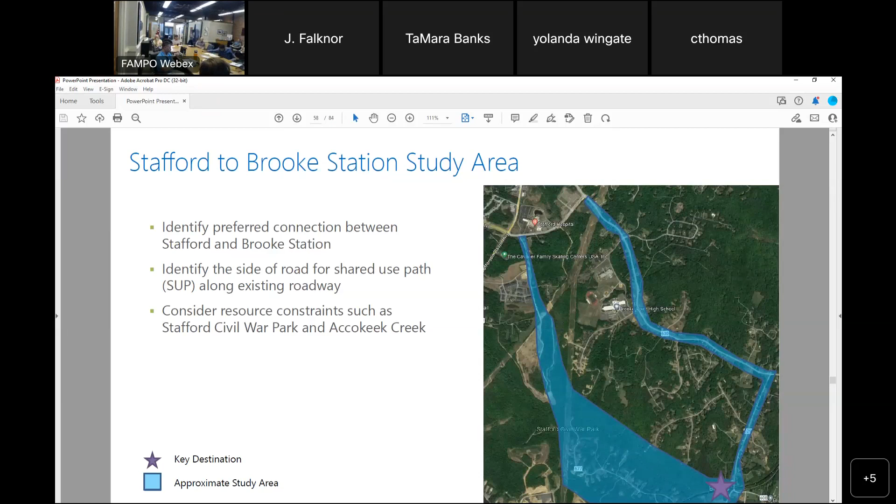I know that we were talking about that from a high level for the roadway, also as far as these bike ped projects go. And we know that the corridors we are considering here do have some constraints. The corridor that we're prioritizing here is the one that follows... oh my gosh, it's slipping my mind. Name of the road? It's an alternative to courthouse, which is the preferred alternative from the... Mount Hope Church, is that what it is?

Yes, thank you. So the East Coast Greenway alignment for the shared use path or trail connectivity all along the East Coast actually had identified Courthouse Road and Andrew Chapel Road, but we like this corridor as a better alternative for various reasons. Not to say it doesn't have its own constraints, chiefly the Civil War Park, but on the other hand, that constraint could also be an advantage in that it provides nice connectivity to the Civil War Park. We have low volume, low speed facility along this corridor, which makes it more attractive maybe, but...

We could still provide those stub-outs to the major generators like the middle school and the high school to this shared use path. It also provides flexibility for a phased approach, perhaps using in-street facilities for cyclists, and then ultimately something more of a shared use path trail facility along this corridor.

So this is very much in line with, as Ian pointed out, the same group doing both this and the pipeline. As part of the pipeline study, we were identifying ped-bike connectivity, and this just happens to align very, very well with what we were considering for this East-West mobility study as well.

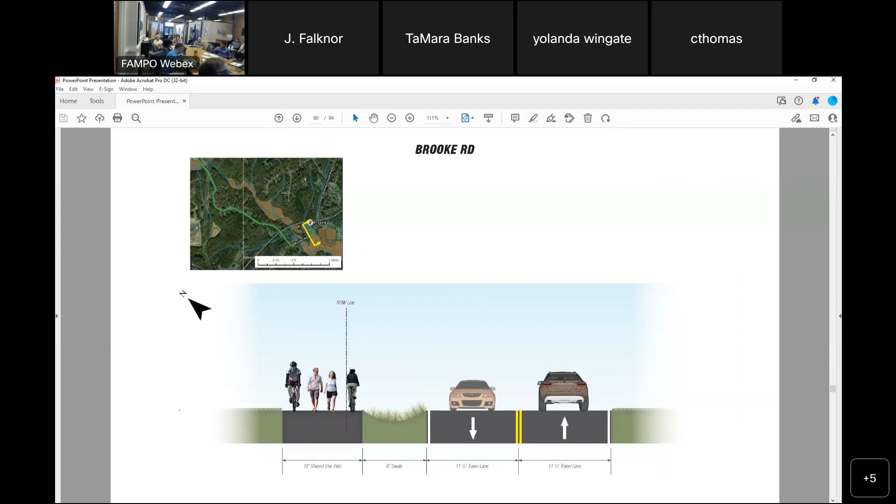This just gives you a conceptual view of ultimately what we think would be an attractive facility here for our vulnerable users, our bikes and peds.

So moving on, the Spotsylvania, similarly we're trying to make that connectivity from the major population centers down to the Spotsylvania station that Drew was circling, and also provide that east-west connectivity to Germanna College and the shared use path that's being constructed now across 95. So this provides that nice connectivity from east to west as well as north to south.

There's a shared use path being built to Germanna College, so this really provides that network for our pedestrians and cyclists to access the station, as well as points west and north.

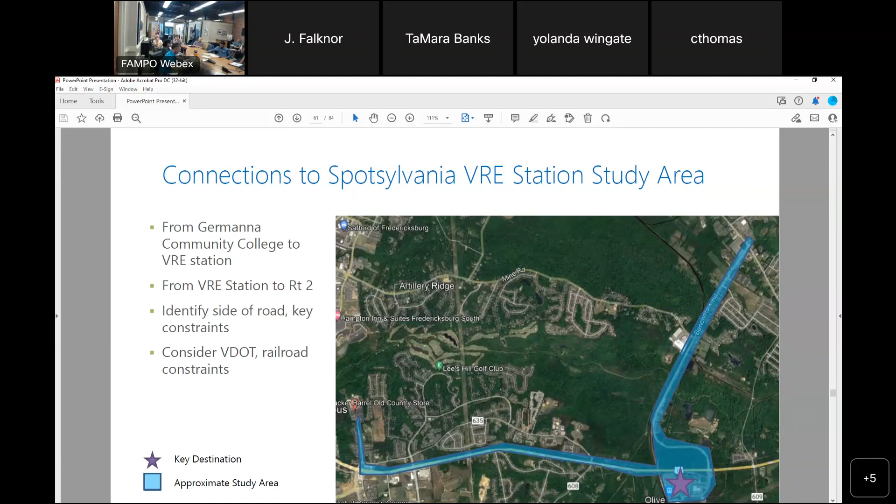This alignment, I think we can go to the next sheet, would be following the south side of US 17. There are advantages there. We have what appears to be sufficient right-of-way. It also provides flexibility for future widening of that corridor to the north, and then as far as the north-south connection, what we'd be doing is following the rail.

This provides a lot of opportunity to work, and we've reached out to the Department of Rail and Public Transportation, first through DRPT, who put us in touch with the new agency, Passenger Rail Authority, as far as what our options might be, specifically as we get constrained at the underpass. We understand there is potential for future track there.

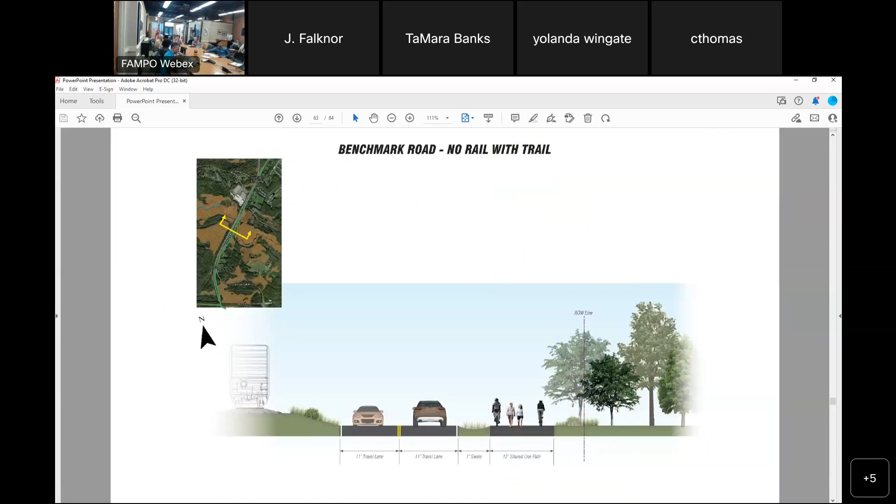If you jump ahead, you can see the section along Benchmark Road. South of Benchmark Road, a shared use path would run parallel on the east side. Next is that potential rail with trail that we'd like to coordinate with those transit agencies on, to understand the constructability and viability of putting this here. Obviously, when you're in a rail corridor with active rail, the separation needs to be that much greater.

And of course coordination, hopefully, if we stay to the east side, may lie with the Virginia agencies as opposed to the railroad, so there might be some advantages here. I'll just say, if you can keep your concepts where the trail is on the east side of Benchmark Road with as much distance as possible, that's going to make things a lot easier. For the time being, I don't know what VPRA said, but I'd suspect they'll tell you to follow the CSX public projects design guidelines for trails with rails.

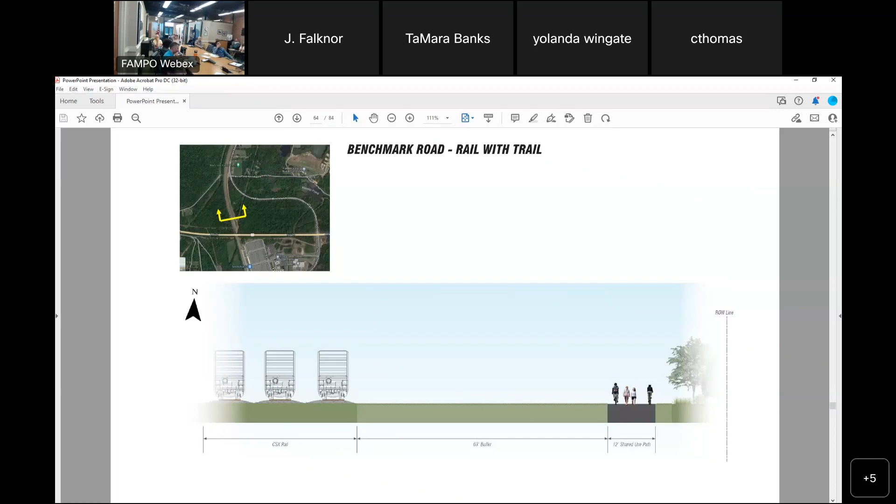So where were we actually crossing Benchmark? I'm on the east side of Benchmark, and the railroad trail is on the west side of Benchmark—where do we cross the road? In terms of, is it at Mine Road or at Merrily Carter Park somewhere? We've talked about a few different options.

There's an existing underpass. I can jump in too—at Haleslip Road is where it's going to be jumping from the east side of Benchmark Road over to the proposed rail with trail. There's a proposed roundabout there, so there would be a bike and ped connection there.

Again, this is a refined concept. We had looked at various alternatives following Benchmark Road. We looked at Eagle Drive as an alternative. We also looked at perhaps using the utility corridor, but due to various constraints, this is the alignment we ended up proposing based on feedback from the Bike Ped Committee and staff.

Is there any major concern about topography and keeping it clear on that east side? That's the only concern I've had, near the Pelham's historic site at the corner of Benchmark. There seems to be some real steep topography up near the Mine Road intersection where the rail is, and there's one rail spur you run into, which is low volume—but is topography a real big issue? The next phase will be to dive deeper into the constructability, the engineering side—preliminary engineering, I should say.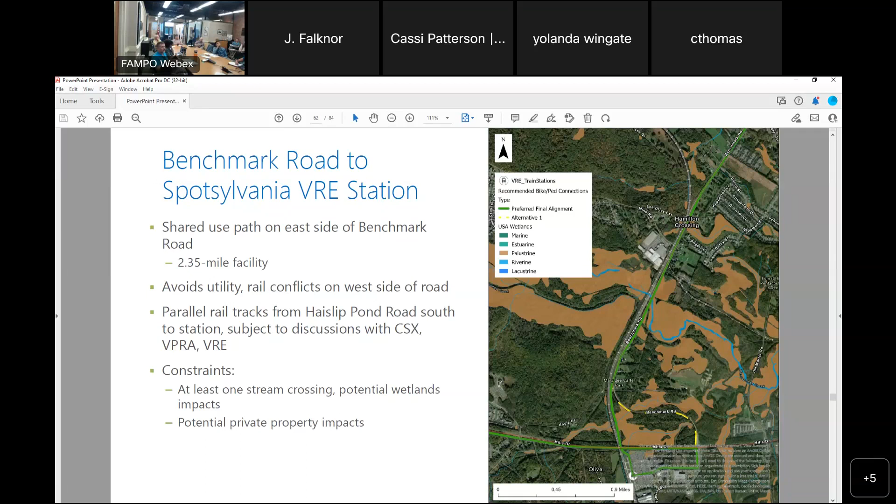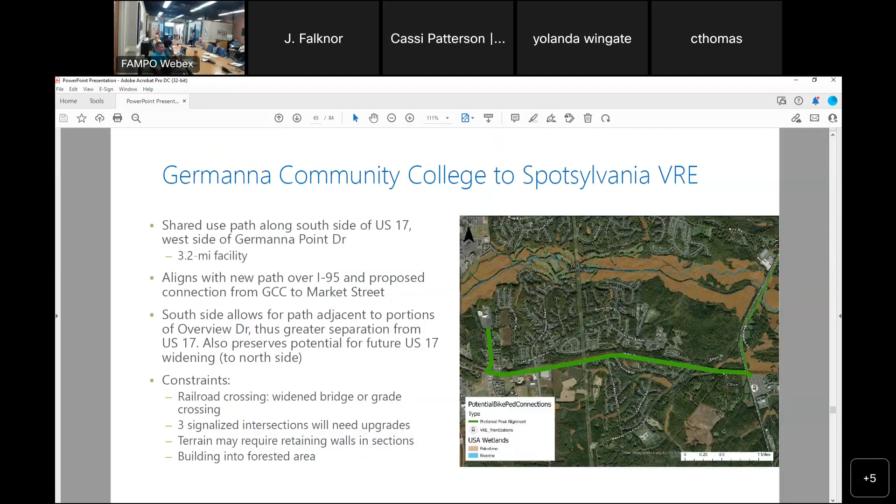Moving on—I think I covered this, it's just some background. Obviously the constraints, you mentioned the spur, we also have some topography, and the at-grade crossing that you mentioned. So we do recognize these things, and we'll be diving into those a little bit deeper.

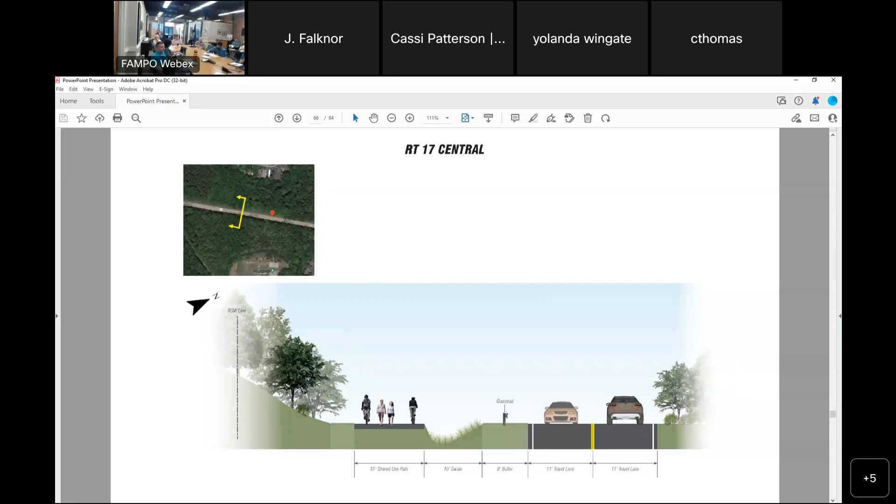This just shows you that on Route 17, there's some topography issues on the south side too, but we like the south side. There could be some structural considerations, some retaining walls perhaps, but we think we can get a 10 to 12 foot shared use path facility on that south side. That lines up with the I-95 bridge too, so that's good. Exactly.

That just shows how the topography changes along the corridor. We'll save the stakeholder discussion until we get to the end.

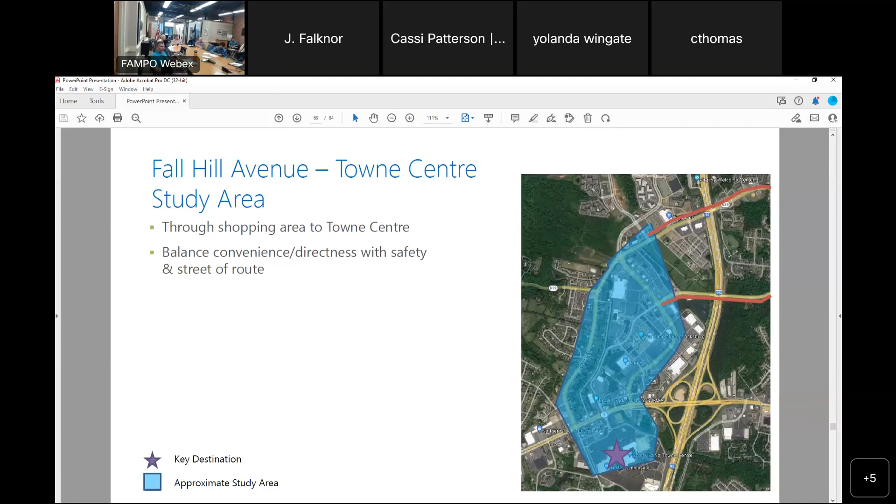Now, these are the two that are lumped together in the roadway report. The first one being the connectivity of the Carl D. Silver and the Towne Centre on the south side of Route 3 with points to the north and points to the east on the other side of 95 via Cowan and Fall Hill. We've investigated a couple of different alternatives, and where we've landed is a shared use path on the east side.

Of Carl D. Silver Parkway, north of Cowan. South of there, it follows the alignment that was proposed as part of the small area plan. So we think the ideal situation is to be on the east side. That lines up with the crossings over to the east side of I-95. It avoids some major intersection crossings up to the north.

There are some constraints, there are some impacts. The impacts to the parking areas, for example, we think it would probably consume about 165 parking spaces. Obviously that's a political concern perhaps, but it still allows for the circulation of vehicles in the shopping center.

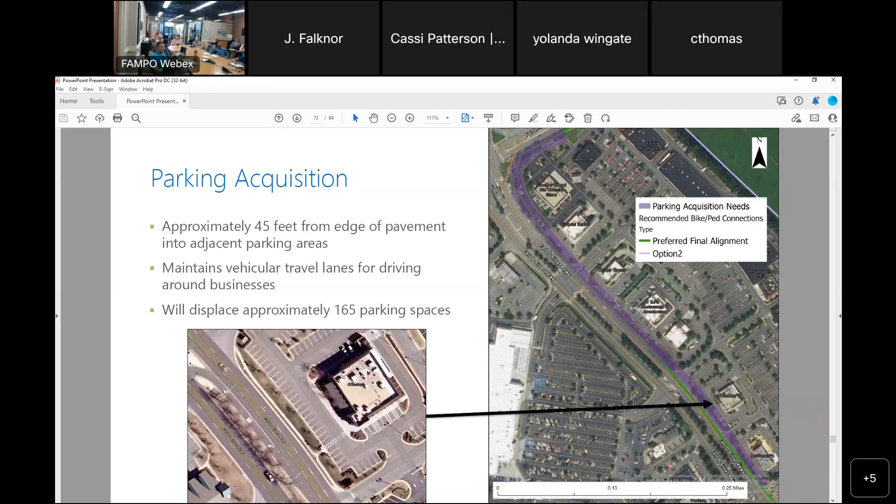Again, this is a continuation of what is in the small area plans to the south. We did investigate the east side. You can see there's some green space back there, but from a safety and security point of view, as well as accessibility, we like keeping it along Carl D. Silver Parkway.

So it crosses Carl D. Silver Parkway at Cowan, is that right? Correct. Yes, and that avoids some free flow situations up at Fall Hill. It's meant to connect with the shared use path on Cowan and the shared use path on Fall Hill. So the idea is to try and connect all of those into one network of bike and pedestrian trails.

Part of my job coming here has been to try and connect, join the dots. So many transportation infrastructure projects in the region don't connect to the next project. Sidewalks that don't—some people write in the newspaper that this sidewalk doesn't go anywhere. Well, it's a nice sidewalk, but it's only been built along 2 miles and then it stops. And the same thing with these bike paths, so they go quite far and then they don't always get you to the final destination. Can you say a little bit more about how this crosses Route 3?

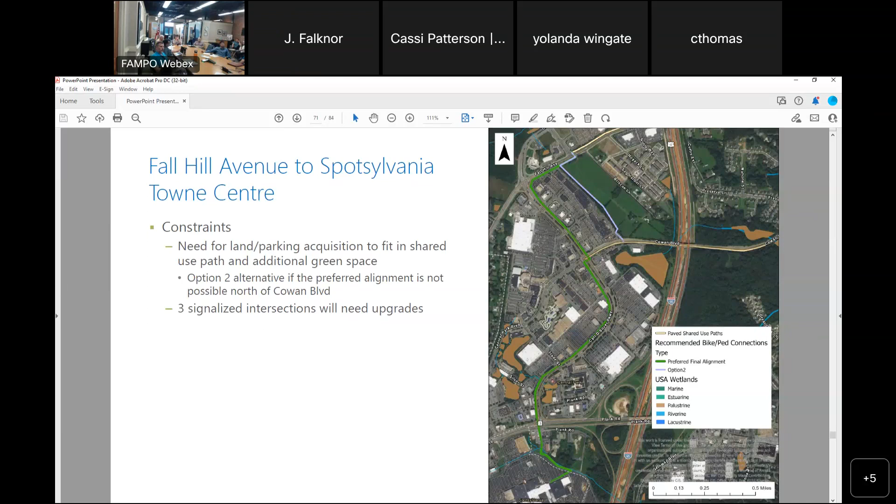Yeah, I mentioned that earlier, that was addressed as part of the pipeline study. We have some concept sketches as far as how we can work that pedestrian signal phasing into that existing signal. We've done the traffic ops already for that as part of the pipeline study, so we have addressed that. It would be on the west side based on the traffic operations and also from a safety standpoint.

Drew, did you—oh, no, I was just going to ask if you wanted to give any more color to what that looks like, to answer our question. Because on that particular road, isn't there 2 right turn lanes from Route 3 with traffic that doesn't stop? So I think what would be helpful in future—oh, it's on the east side, you're right, thank you.

With your slides and with the final report on this, yes, if you could put in 1 or 2 diagrams from the pipeline study, which you also did, in order to just join the dots for people. Absolutely. Yeah. Yep, we tried to squeeze this down. We had some concept sketches for the Bike Ped Committee that we can pull back into this slideshow as well.

No, this is at the mall court extension. So you do have turn lanes there, but nothing that we can't engineer around to provide connections.

A suggestion: the city just recently had a TRC meeting, a technical review committee, with the developer who's come forward with a proposal for that long, skinny remaining open space right there. The city is asking for them to include extension of Gordon Shelton Boulevard through that property, meeting Cowan. So that could be an opportunity to extend the multi-use path along that parcel.

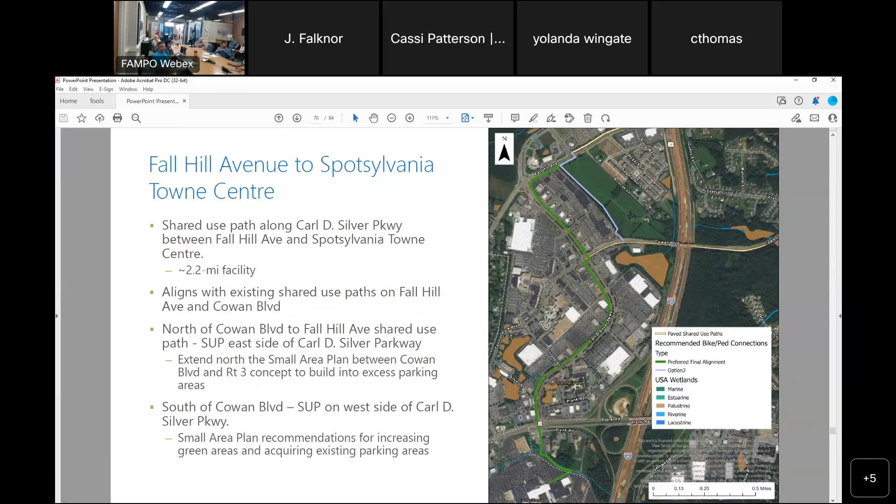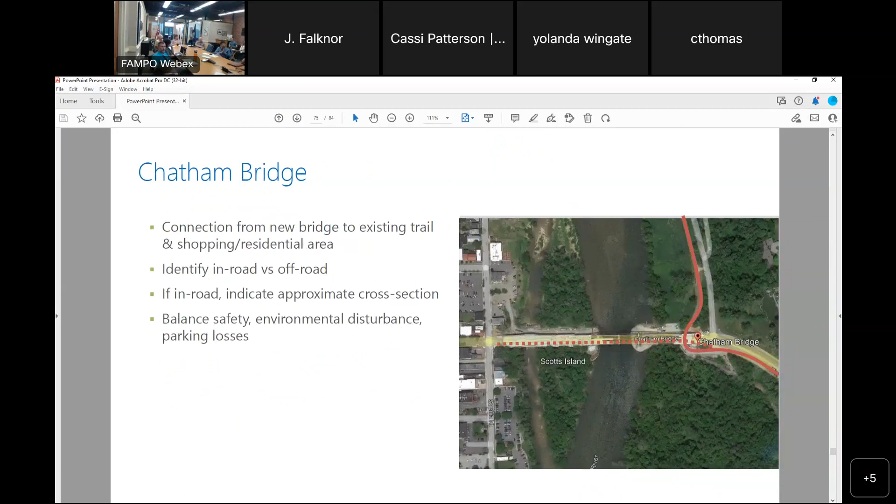So last but not least, since we're running out of time, we also look at ped bike connectivity from downtown Fredericksburg to the other side of the river using Chatham Heights, via the brand new bridge. And the facility, as Ian alluded to earlier, is one of those new facilities that is coming with a shared use path, and we'd like to connect to it and continue it up Chatham Heights Road. That's exactly what we're proposing.

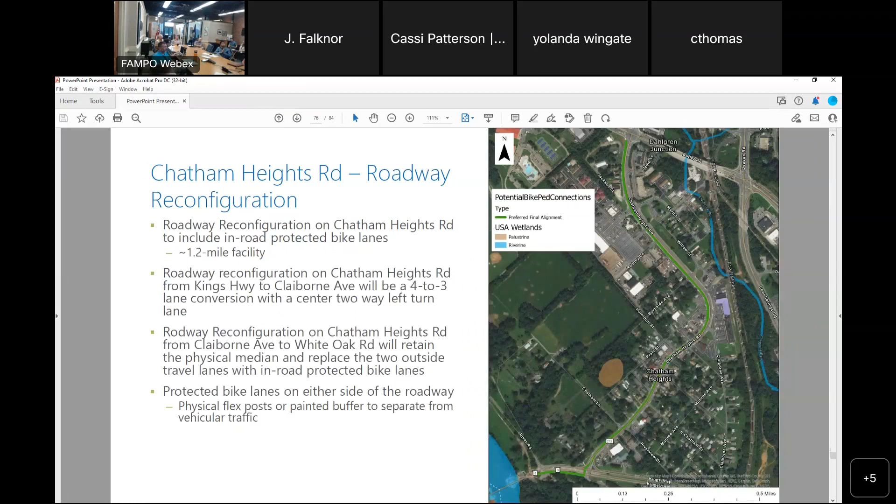And on Kings Highway, the way we propose doing it is to take advantage of the existing shoulder on the south side. That roadway is evolving, and we think that excess shoulder is something we can probably take better advantage of, using it as a shared use path. You could probably just jump ahead.

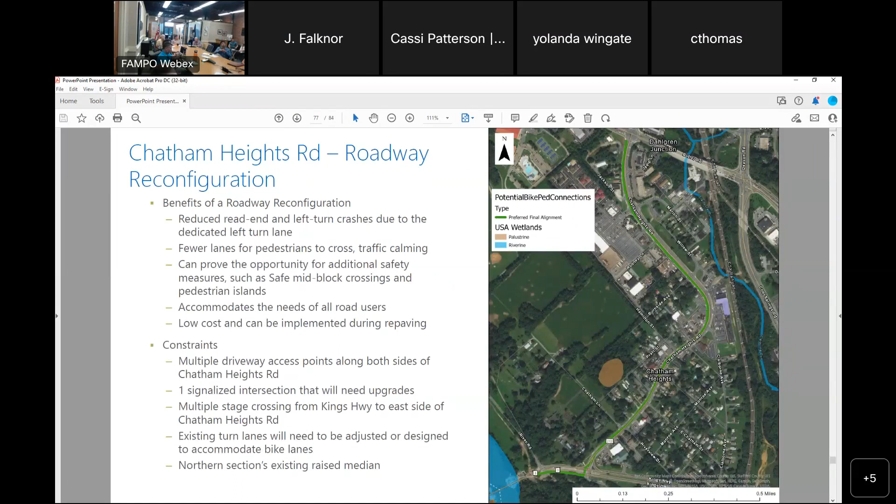And for those of you who were just now shouting at me about building more and more road lanes, well, this proposal is to take away road lanes, and I'm sure VDOT and Alex are ready to murder me for even thinking about this. This wasn't my proposal, but this is taking away road lanes and giving them to bikes. So on Chatham Heights Road and Kings Highway, it's actually taking away the shoulder, which may or may not be a design waiver or exception, depending on what that facility is and will be in the future, as opposed to what it was and why that shoulder was there.

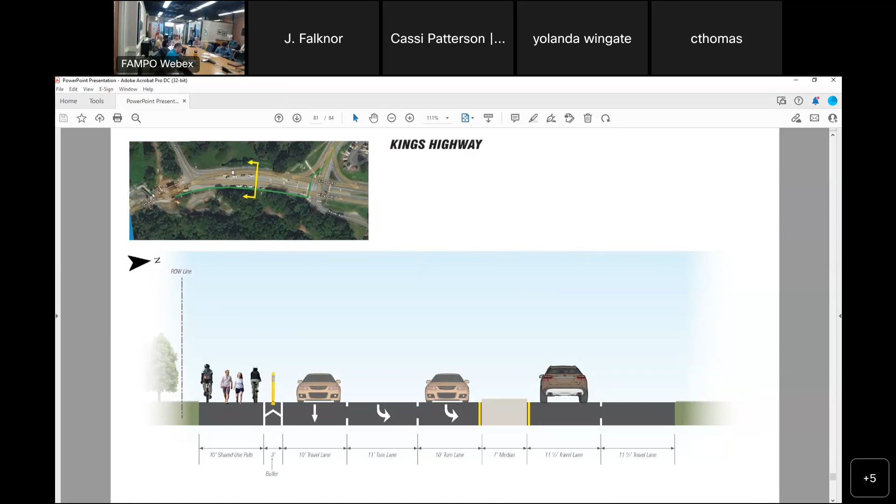But what you see here is a shared use path on the south side, retaining a sidewalk on the north side of the road. Now, if you go back a couple slides, what Ian was talking about as far as Chatham Heights Road is a roadway reconfiguration, or what we used to call a road diet.

This is a traditional 4-to-3, at least on the southern half of the roadway. The idea is that we would take away a lane but provide a 2-way left turn lane in the center of the road, getting our left turns out of through traffic, allowing them to have that space.

It also provides potential median refuge for crossing of Chatham Heights Road. A lot of good benefits to that, limiting exposure of our pedestrians crossing the street. It's a traffic calming effect. We're looking at the ADT on that road, and it fits in very nicely with what is typical of a 4-to-3 roadway reconfiguration. So we're not into the preliminary engineering of this yet, but you see some cross sections, though whether that's a buffer with flex tube or a median separated facility is still to be determined.

The north side of it would still remain with a center median island, then taking the outer lanes in either direction for a bike lane. I know Alex had mentioned some concerns about the number of driveways, and we have familiarity with similar corridors with similar access points, so we think it can be done, and we think that's the preferred alternative to taking a lot of land to put in a shared facility, because we are limited as far as rights are concerned.

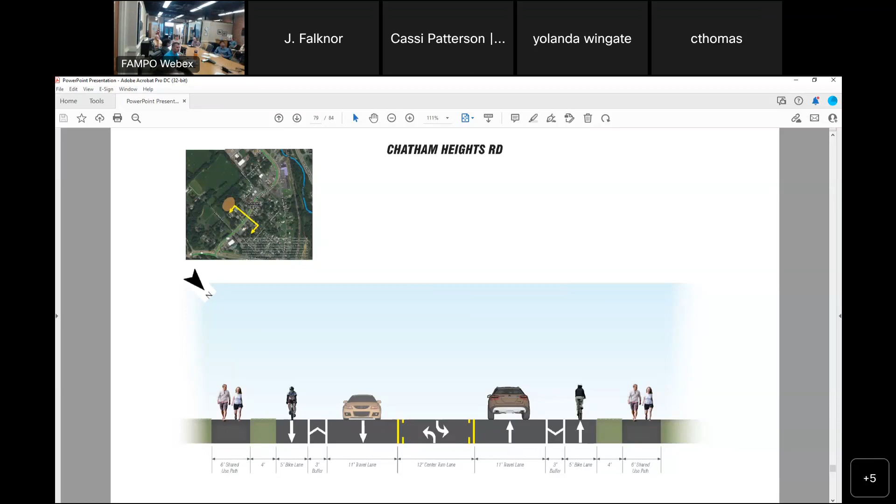Those are the 4 ped bike projects that we are... With that, if there's any questions. I just have one really quick one about Germanna Point.

So we initially were thinking the west side as well. We ended up filing a TAP application that scored really well, but unfortunately just didn't get selected to go from 17 to most of the way to Germanna. We had community college, we had to be sensitive to costs. But through scoping out with VDOT, what ended up coming out of that is we were advised to put that, in this case, on the east side. So with our TAP application, they switched sides of the road. I think there may have been some sort of underground utility infrastructure — there was some reason why we ended up having to switch it, and I'll provide this to you.

Yeah, that'd be great. I understand why you would do it, because we actually have a shared use path on Hospital Boulevard, and on the road crossing we're going to have to just address it at the crossing. But I'll give this to you all, just so you have it. Thank you very much. Maybe just email it over to them.